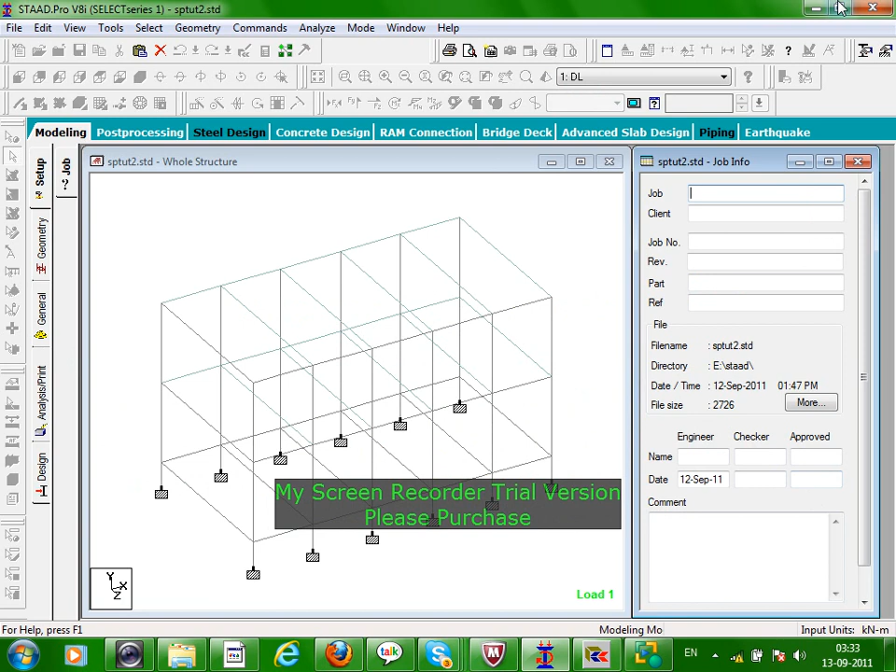In this problem, a space frame has been generated. Now you know how to generate space frames, right? You go to the structure wizard, open the frames, and in the frames give the global x, y and z direction dimensions, as well as the panel dimensions, and paste that particular model into your main frame. So this is the one problem.

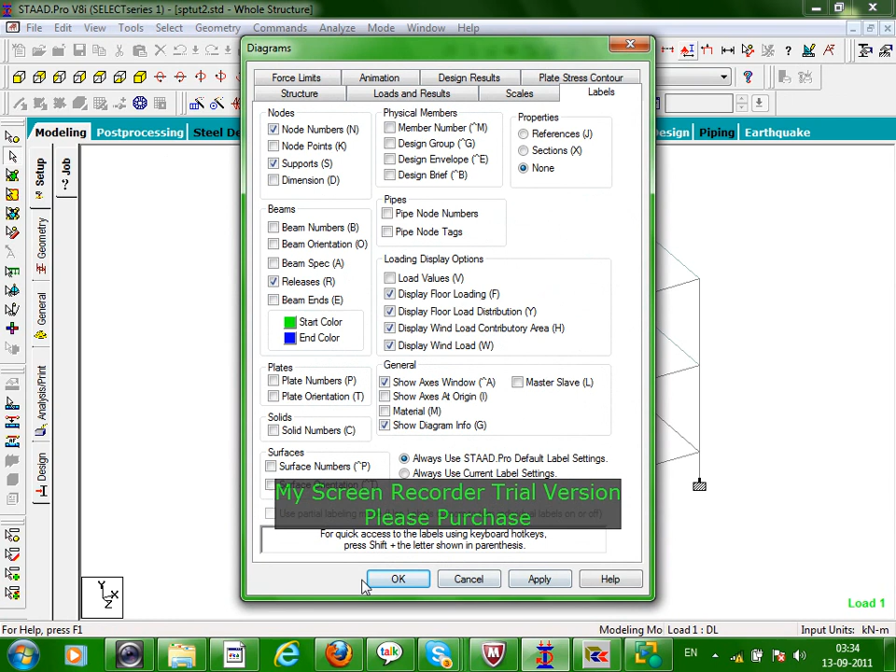Now here, if you see, just for the explanation only, I am clicking the node numbers. These are the node numbers over here. One is on this one, two, right? Like this, all these are the node numbers. Again, I am giving the beam numbers. So at any stage, if you want to see, these are the numbers.

I am removing the beam numbers, now applying the plate numbers. Okay, so you can see that at the ground floor slab level, plates are introduced: 85, 86, 87, 88, 89, then 90, 91, 92, 93 and 94 at the first floor slab level. At the plinth level, no plates are provided, only the beams. So you can see it over here. This is the simple beam.

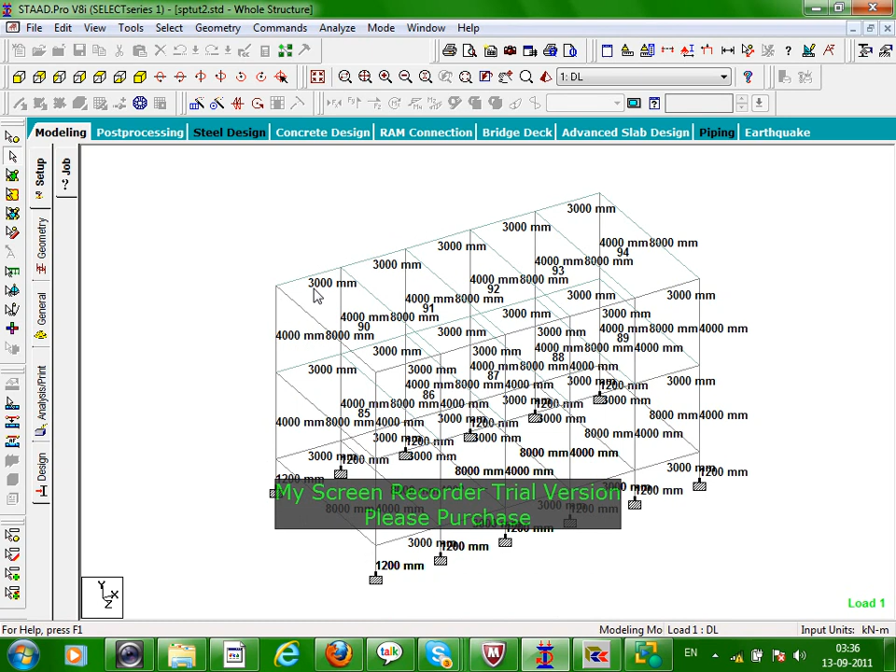As far as the dimension is concerned, all these dimensions are 3 meter each. In Z direction, the dimension is 8 meter. Plinth height is 1.2 meter. Then floor to floor height is 4 meter. So this is a simple, very typical space frame. Any input file now?

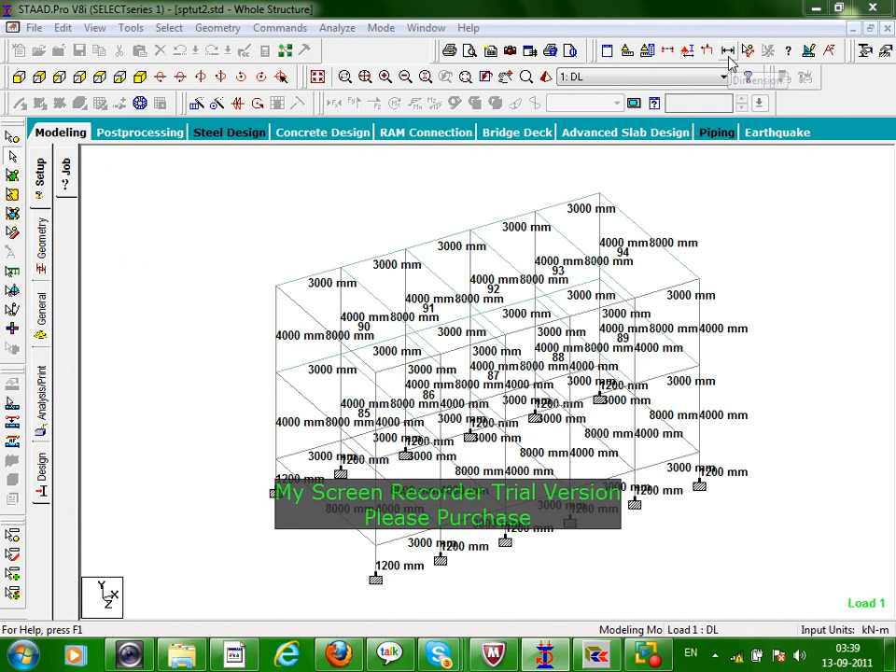Now this one you can do it over here. Let us say, as for example, I am adding one of the plate. So for that one, you go to the geometry, add plate. I am using another version.

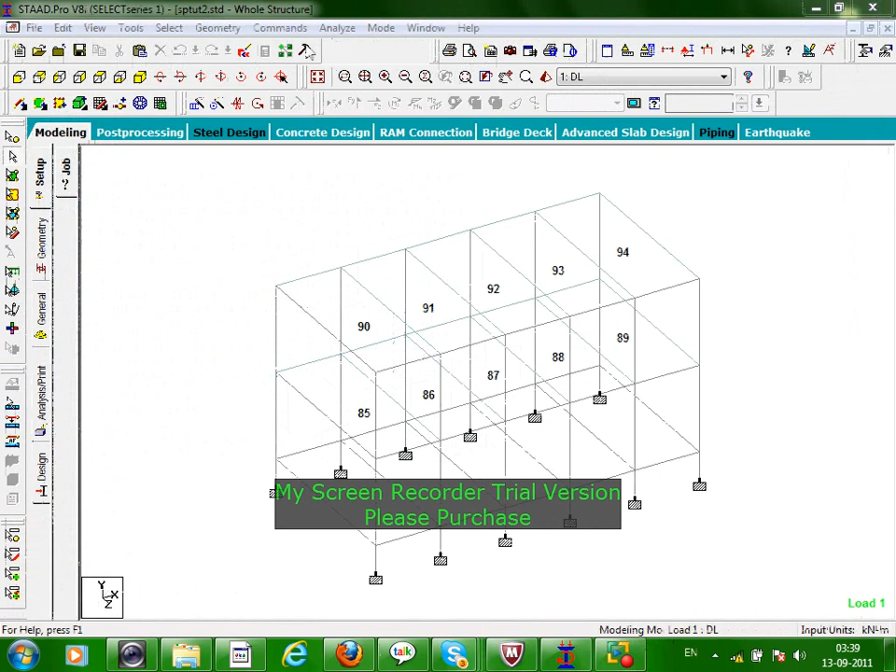So to add the plate at any circumference, you have quadrilateral and triangular plate. So I have selected quadrilateral, selecting the node. So another plate is being added, that is plate number 95. Again, this particular plate, 95, 96. So this is how you have to add the plate.

It is not like that way that in XZ plane only you can put it. Suppose if you want to add one of the plate over here, that you can do it. So this particular plate, 97 number plate, is in YZ plane. Vertical. At any stage, suppose if you want to add it, because this is a very small problem, but if you want to edit any particular member specifically, that you can do.

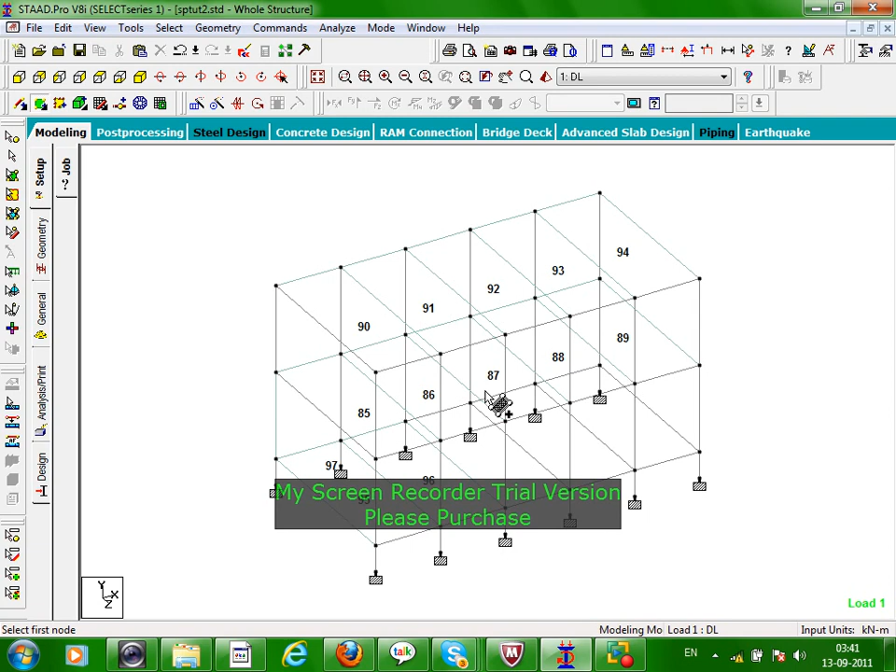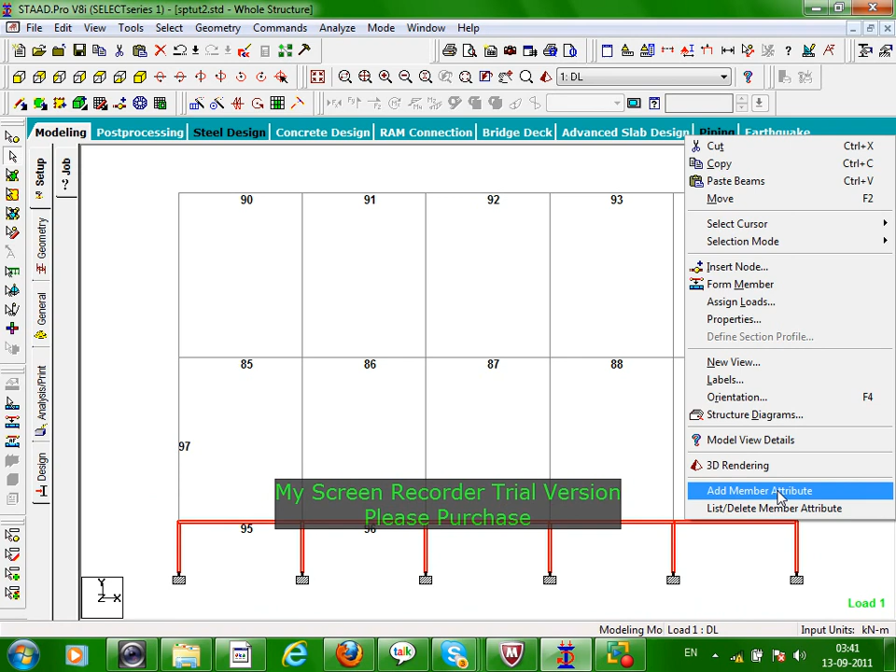Let us say I want to work over the planes, so select that one, right click the mouse, new view, create a new view. Okay, now it's 3D. Plate cursor you have to provide. No plates over here. Right. If you want to go back, whole structure, click that one.

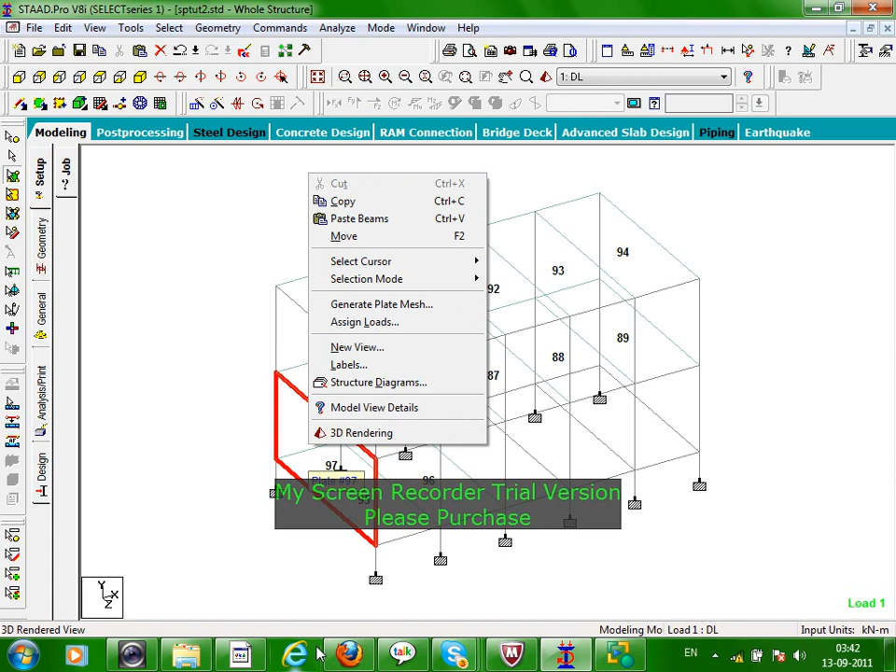Now I am removing this one because at present it is not so required for me. Plate number 97, 95, 96. So I am going to the editor. Removing that one. Okay. So this is how you have to input the plates. At the maximum, sir.

Now the loading. Supports you can give it, no problem. So commands. Loading.

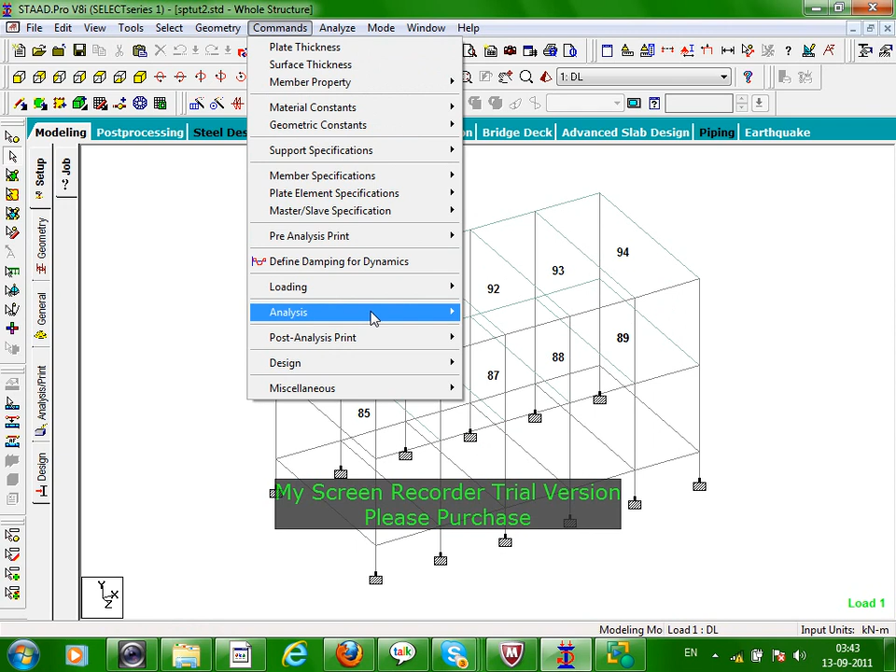I am closing this one. And while going through the editor, showing that one. See, the element property is being given. So 85 to 94, all these plates are of 0.15 thickness. Supports 1 to 6, 25 to 30 are fixed. Load case 1 is the dead load.

Member load, this one is understood. Member number 1 to 15, as well as 34 to 48, 67 to 84, all are subjected to some UDL, gravitational loads, 20 kilonewton per meter. This is member loads only, that you know.

This is important now. Load case 2, specifically it is being generated. It is from the slab, because my basic idea is how to transfer the load from slab to the beam, right? So load case 2, load from the slab, area load 73 to 84, A load minus 10. What I mean to say, that on the plate 10 kilonewton per meter square total load, or it may be a factored design load, is being applied.

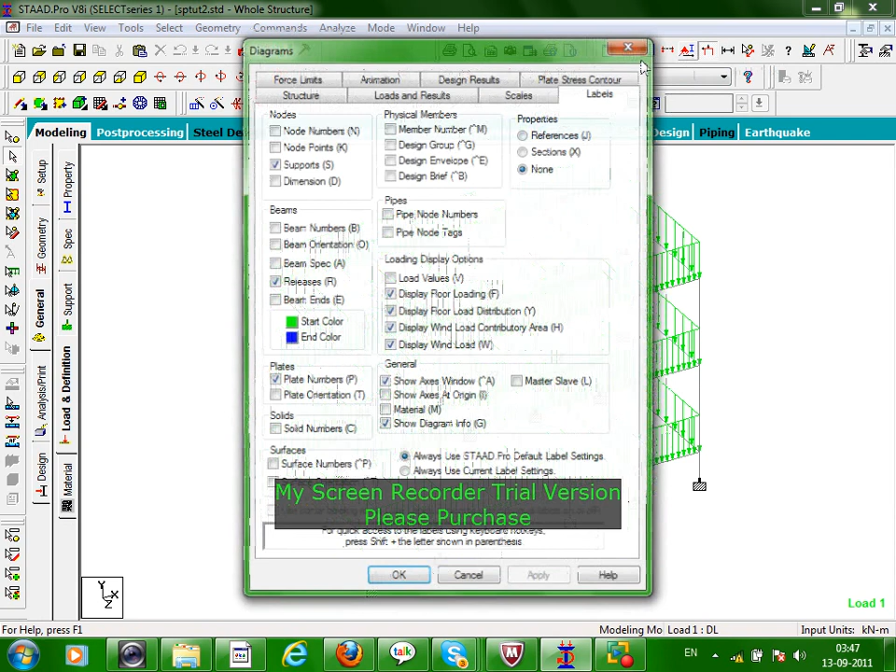See, this particular facility is over here. Dead load, live load, and these three load cases you have defined. First is the dead load. That is the uniformly distributed load, which you can see over here. Let us say load values print, apply. So you can see that all the beam members are subjected to the 20 kilonewton per meter UDL. Is it okay?

Second load case, it is from the slab. If I click it over here, it doesn't show any load. Area load would not be over here at present because it is being just generated. Once you go for the analysis, after completing that analysis, you would be able to see this load, right? So what we have given is 10 kilonewton per meter square.

This particular dimension is, let us say, 3 meter. So 10 into 3, 30 divided by 2, QLX by 2. So 15 kilonewton per meter load would be over this beam, or in this beam 2 times from plates 90 and 91. On this beam 2 times from plate number 85 and plate number 86.

So let us go for the analysis. Run analysis. Stay in modeling mode. Okay. Now you can see that load from the slab, the second load case, is on now. On this particular beam, the load from plate number 85 is minus 15 kilonewton per meter. On this particular one, it is 30 kilonewton per meter. So straight away, the slab loads are transferred in one-way distribution form. Is it okay?

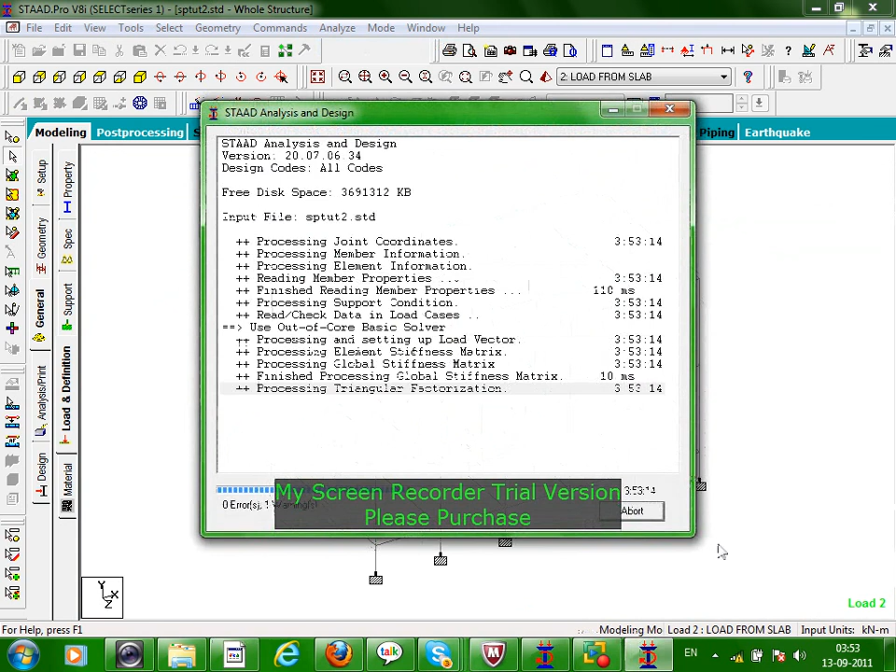Design element 85 to 94, design beam, design columns, concrete take-off command is applied, so you can find a quantitative analysis too. Now, before we see the design details, let me say that these are software only, and as a designer or as a STAAD user, you have to see how to operate this design. Because let us see the design details, these are very awkward details over here.

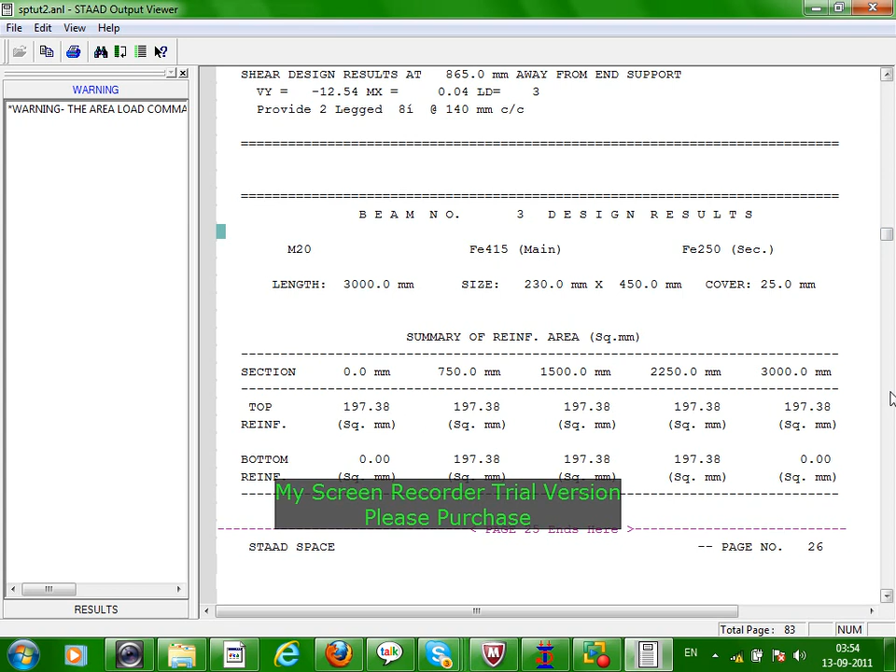So these are the member forces. So beam number 3, design results, right? M20, FE415, FE250 secondary. Length is 3 meter. Size of the beam is 230 by 450. Cover is 25 mm. Top reinforcement 197.38 mm square. Bottom reinforcement, something is given.

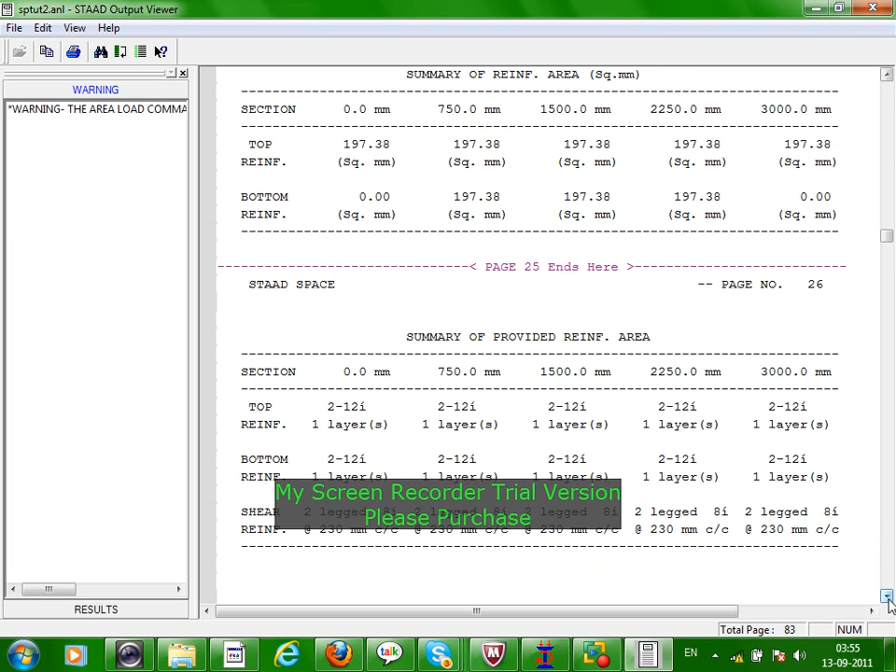So STAAD suggests providing two numbers 12 mm diameter in one layer at the top of the beam, and at the bottom two numbers 12 mm diameter. And these are the details about the stirrups: two leg 8 mm diameter, 230 mm center to center. Now once you see that one,

this is the concrete takeoff command, right? For beams, columns and plates designed above, concrete quantity represents volume of concrete in beams, columns and plates, reinforcing steel, everything. So these are the different bar diameters used in the design, and the weight required is this much, and 28.92 ton steel is required in 47.1 cubic meter of concrete. If you are interested, you can pick up this one.

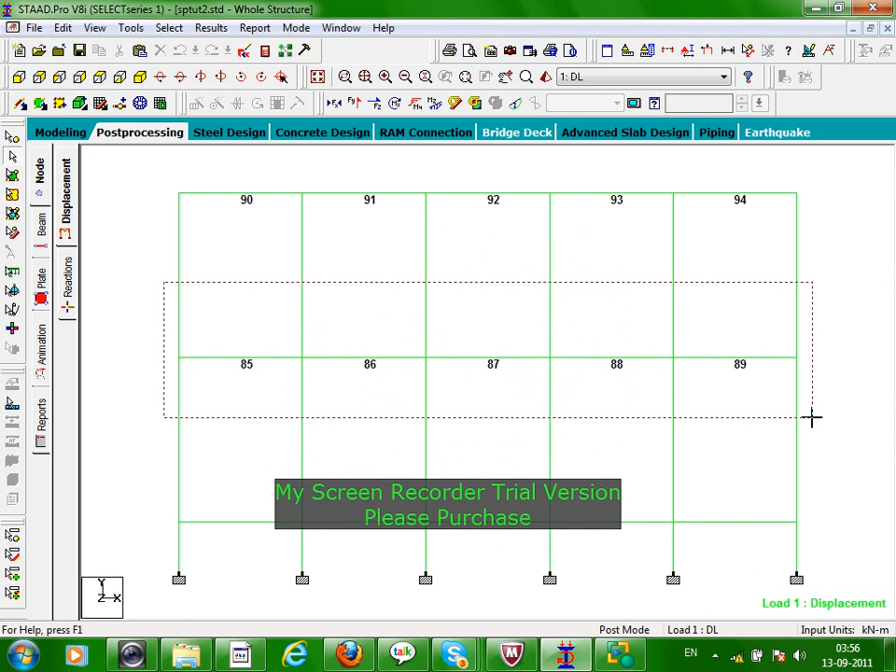So post processing mode. Let us see this post processing part. I am taking this particular part. Right click that one, new view. Okay. It's a bending moment diagram. Click that one, shear force diagram for all the beams. This is a longer beam. If you want to see the values, go to results, view values, shear.

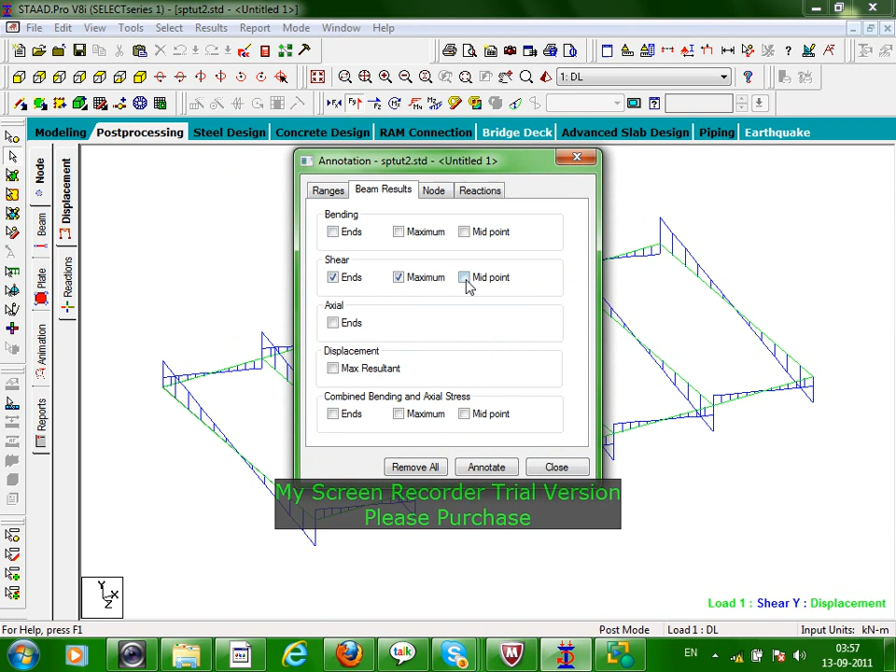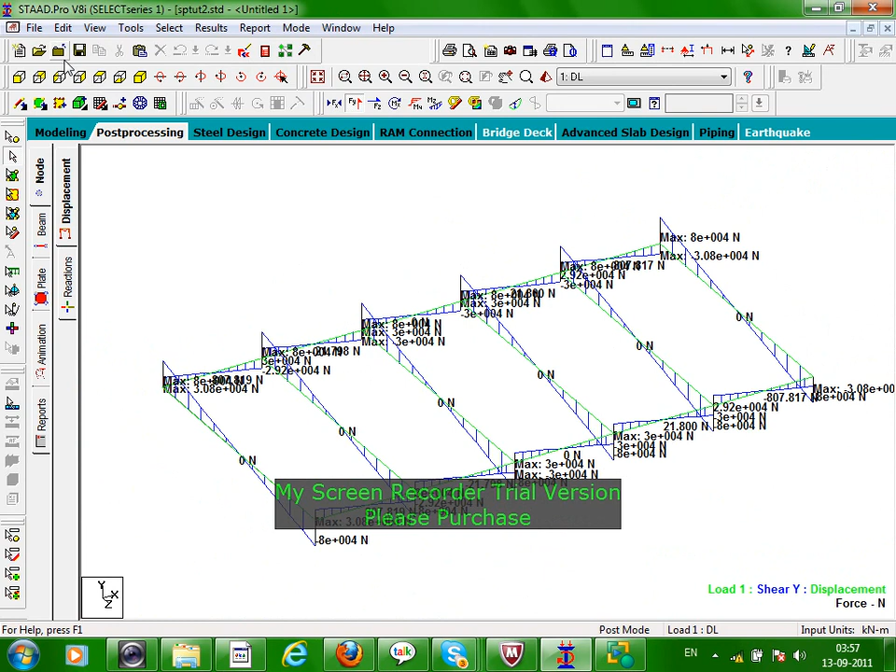If you want to see the result element wise, it's okay. Completely the whole structure, three-dimensional view. And this one, let's say

Actually, double clicking that particular member, property is okay. This is the geometry. Property is simple. Loading, shear, bending. Now you can see over here that at the support 42.34 kilonewton meter bending moment is there, and the one creating tension at the bottom is 117.66.

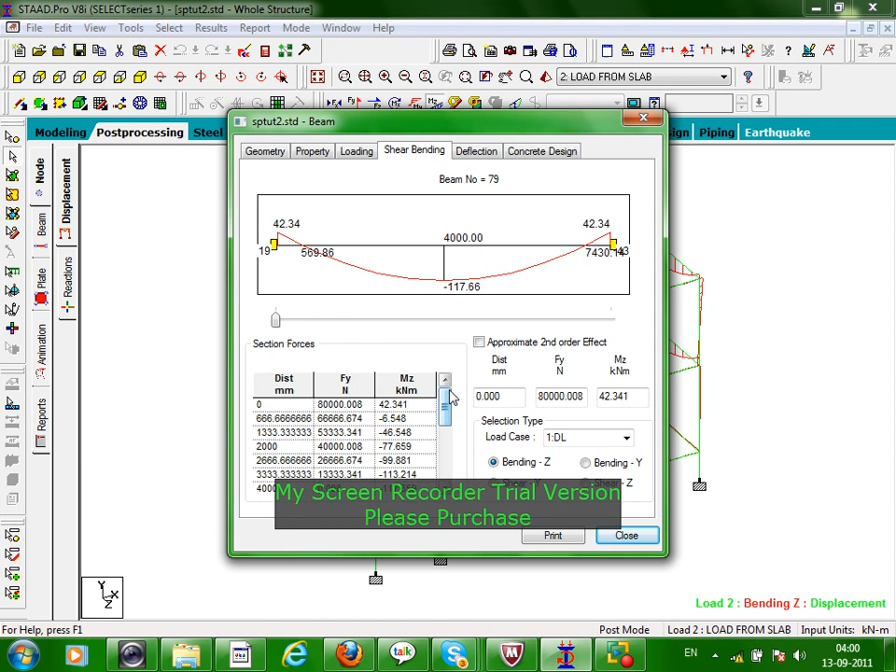at different distances along the length of the beam, you can find different shear forces and bending moments. This may be useful for the curtailment of the reinforcement, right? This is a particular beam's shear force diagram, deflection, concrete design, everything is over here.

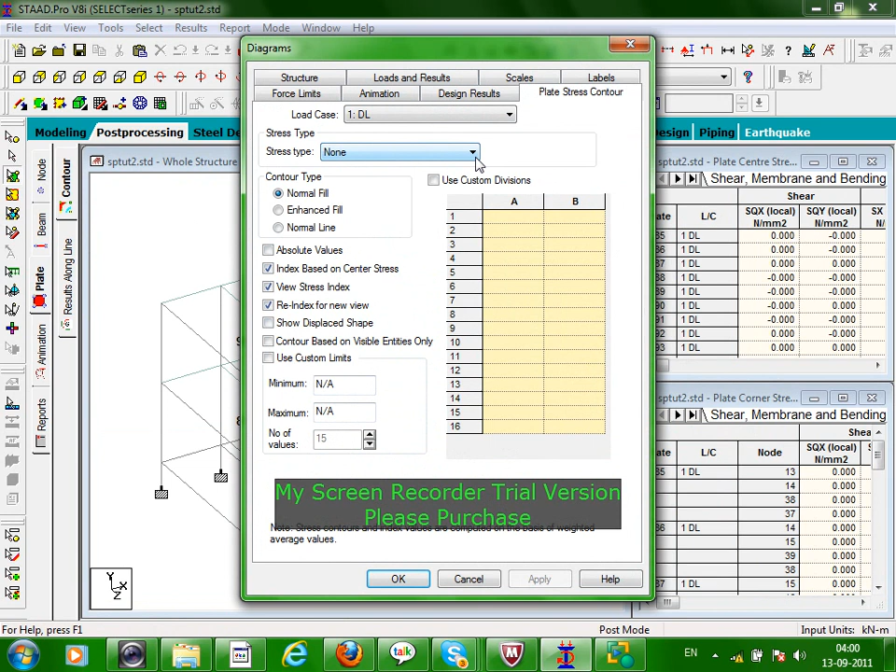So inside the slab, MX variations would be like this way. Now you have to interpret it properly, right? 0.27 local unit is being given, kilonewton into meter per meter.

These are the values. Even on the side too, different parameters, SQX, SQY, SX, all these things are given. This is related to the bending moment MY direction, MX direction.

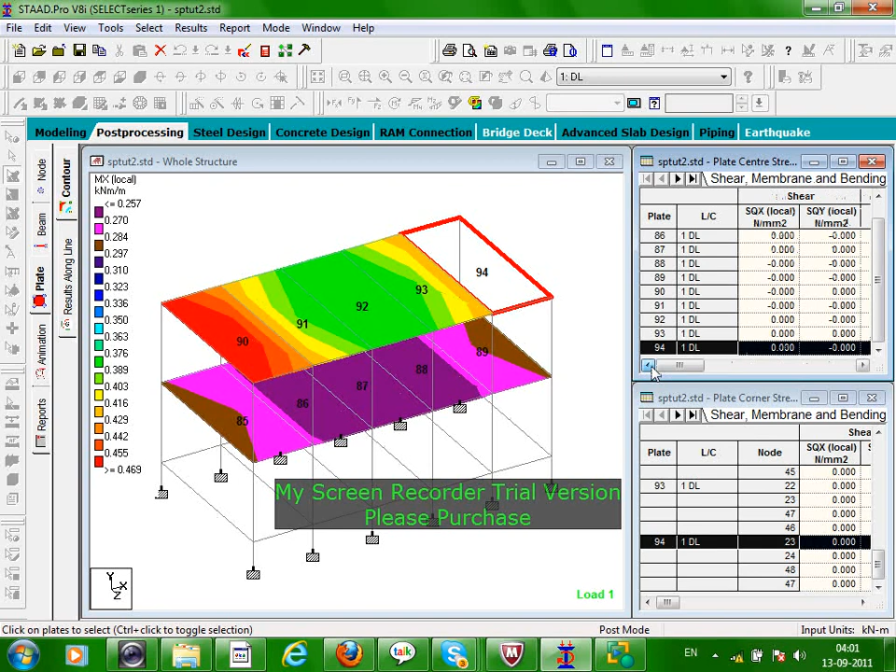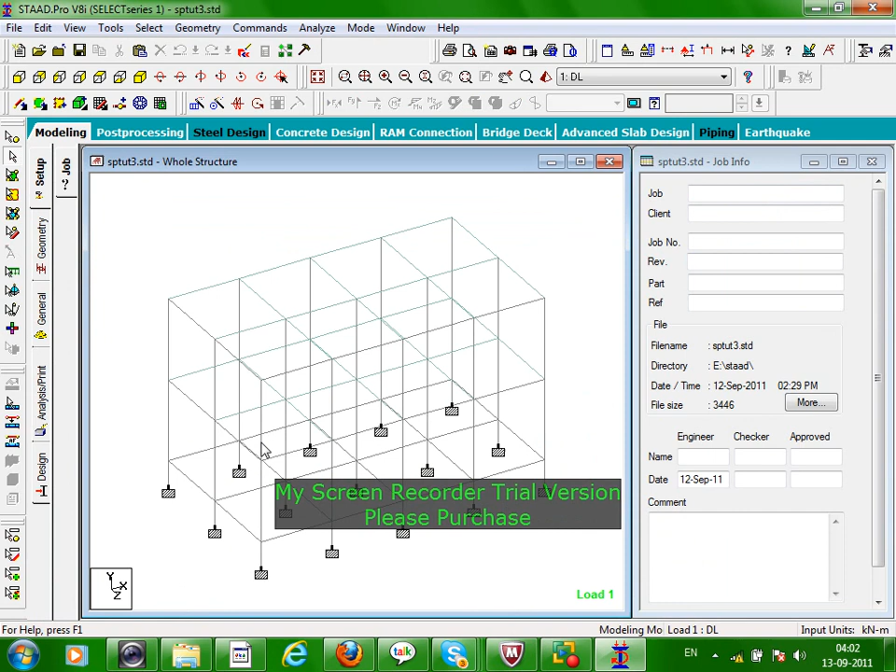Close it, file, open. Not the same problem, right? Now you can see that dimensions are different, but forming two-way action.

Screen display. So you can see that in the X directions, complete structure you have to assume that it is over here. Complete structure at this particular point, right?

Thereafter, X positive, this one. So 3.5 meter distances are there. Along the Z in negative direction, 4 meter and 4 meter. Height of the structure 1.2 meter, 4 meter, and again 4 meter.

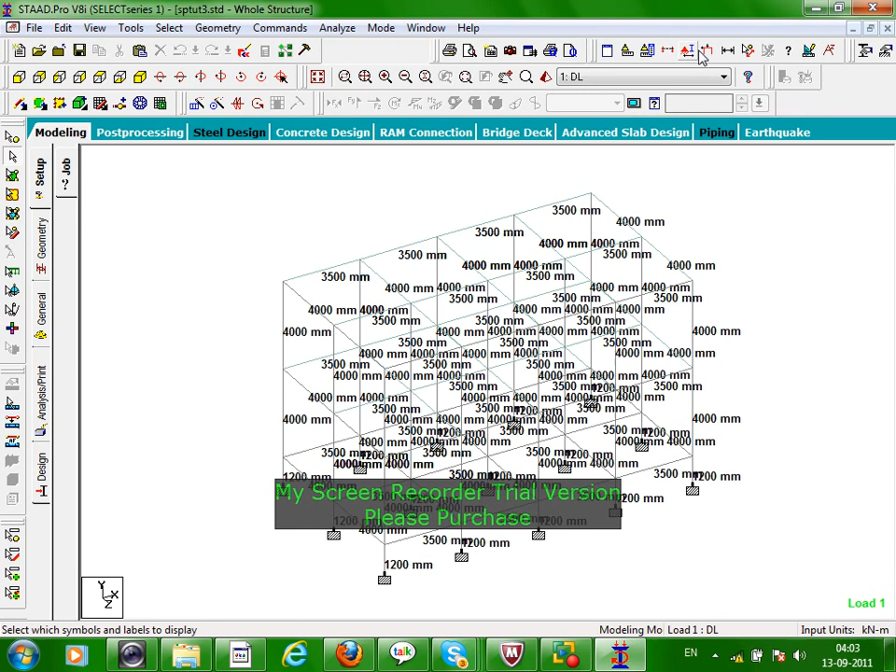Let us see this straight away. The input: units are in meter kilonewton.

Joint coordinates. As usual in the last problem too, different joints with the x, y, z coordinates are being given. Member incidences, that is all the members are connected from J end and K end. Element incidences, different elements are being added. These are the elements. Define material start, isotropic concrete materials, member property, depth, width of all the members.

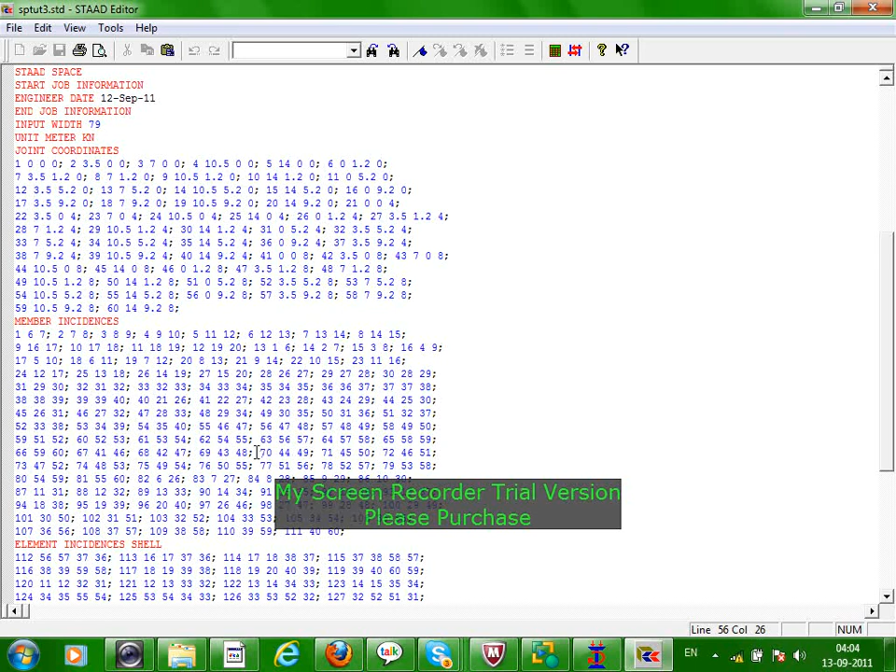Element property, all the elements are 0.12 meter thick. Supports, all fixed. Load case 1 is dead load, that is the member load. Member numbers 1 to 12, 28 and so on.

Minus 20 kilonewton per meter is the UDL. Now this particular part is important. Load case 2, that is from the slab. What I have written, now it is a floor slab. This is a floor load, because I know that plate dimensions are 3.5 meter by 4 meter.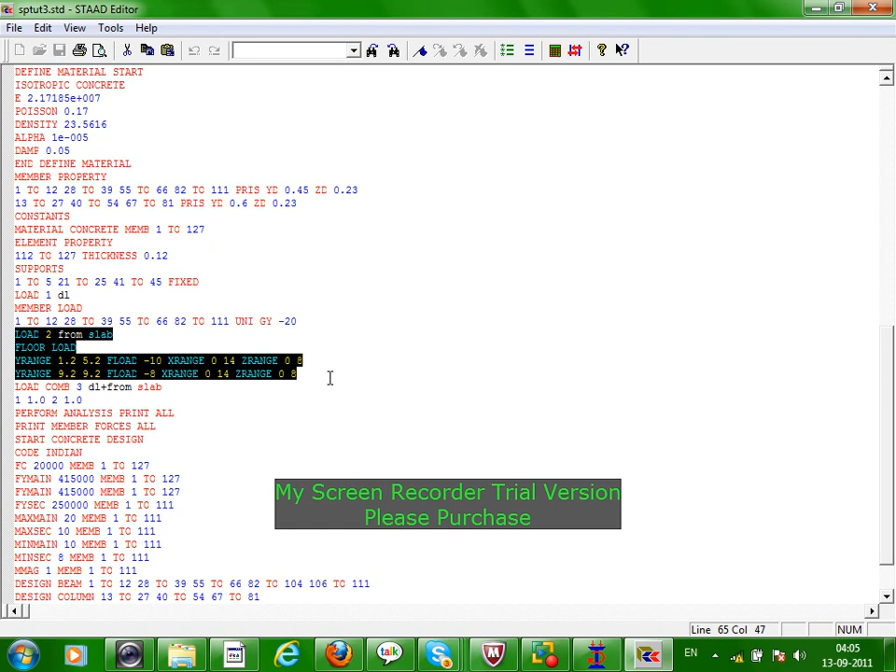Now it is not a one way, it is two way. So I have to direct the software that whatever may be the plate load, you have to transfer it to the adjoining beams in the two-way pattern. So for that one,

floor load, Y range, let us see the interpretation of this one. Y range 1.2 to 5.2. What is that 1.2 to 5.2? 1.2 is the plinth height, right? Then next floor slab will be at 5.2 meter, like a 4 meter is the height of the floor.

So 1.2 plus 4, that is 5.2. So 1.2 to 5.2, all the elements having the floor load of 10 kilonewton per meter square. X range is 0 to 14. So the elements which are in the range from 0 meter to 14 meter in the x direction, and all the elements 0 to 8 meters would be subjected to this particular load, 10 kilonewton per meter square.

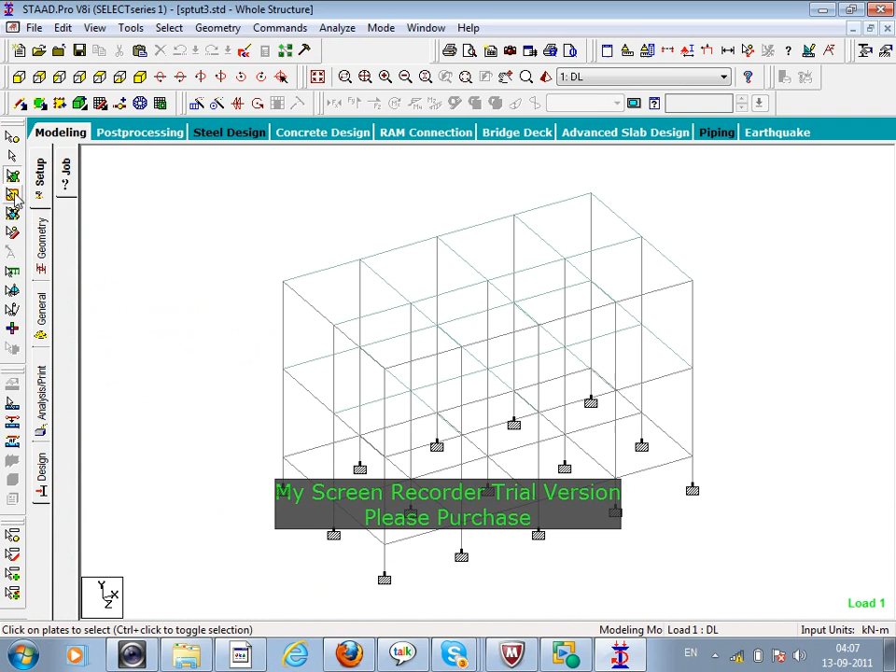Let us see that one over here. X range. See, the plates are over here. All these are plates, right? So as per that, very first one, very first line, this one, this element, or even this particular element, or this one, or this one.

X range I have given from this point to this point. Y is obviously 1.2 to 5.2, right? So at this particular height, X range is this one, Z range is this one, and into that range, that means that this particular area, all the elements would be subjected to load of 10 kilonewton per meter square.

If you want to say this one, this you can see, right? Even see this particular plate number 113, right? This one.

Whatever may be load on this particular plate, shorter dimension is this one. So QLX by 3, it's a triangular loading is over here. This is 4 meter height, right? So this is a longer dimension, and you can see that the trapezium loading is there.

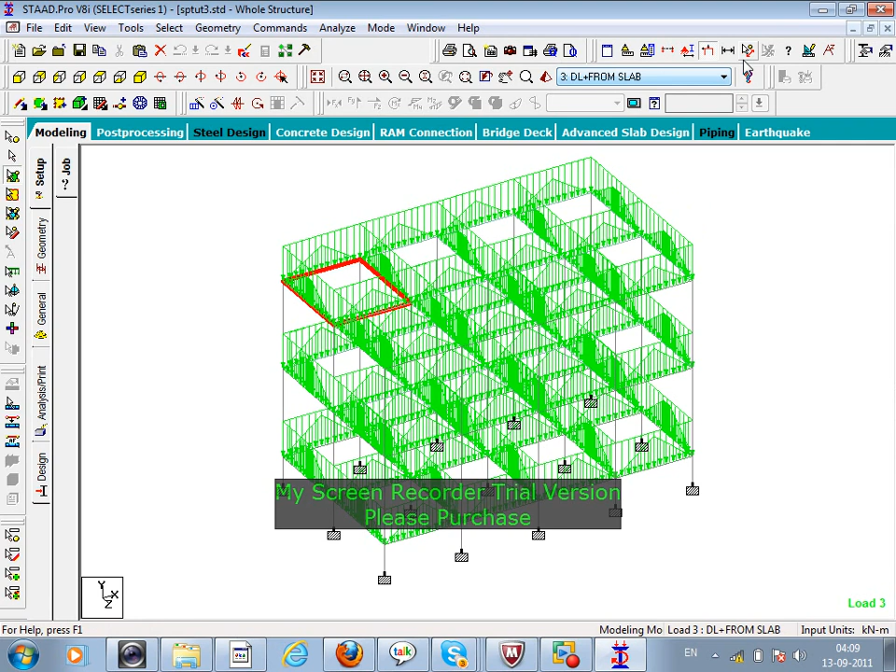Let me remove that door. Now you can very clearly see this, right? It's a trapezium loading. On this one is a shorter side. It's a triangle, then trapezium, triangular loading.

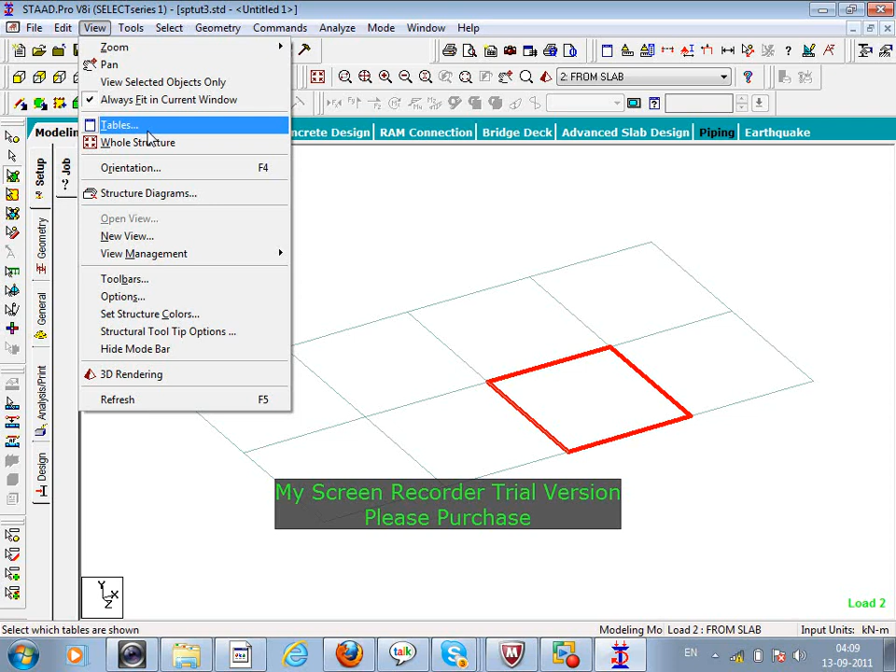Structure. So now you can see that it's a trapezium loading, right? This one.

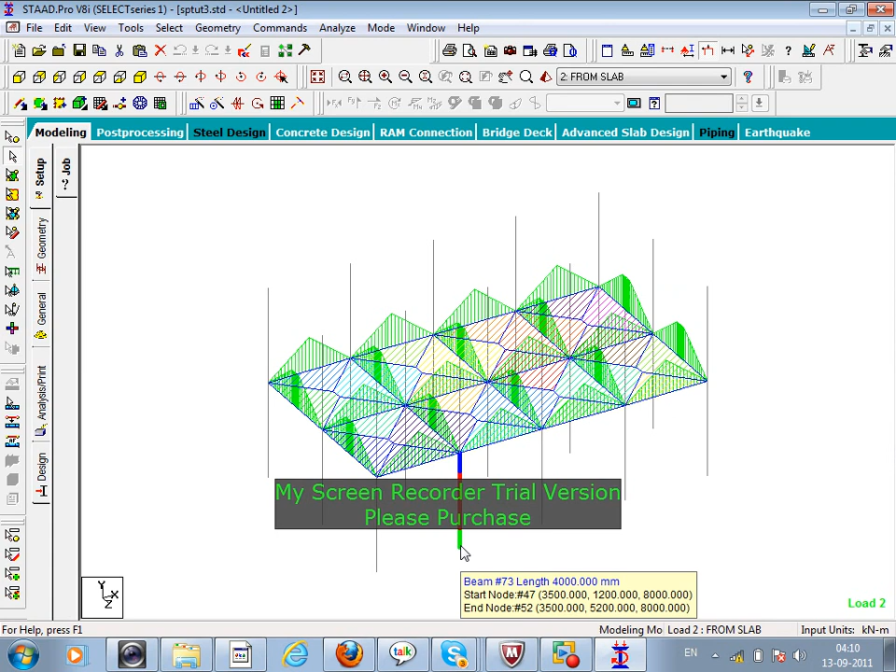Other things are simple now. View again the full structure. Then if you see that input,

load case 2 from the slab. Specifically, two different floor loads are being given. So next line is Y range 9.2 to 9.2. That means at the topmost floor, terrace level, 9.2 meter to 9.2 meter. Again the floor load is slightly different, it is 8 kilonewton per meter square. In the next line, X range is again 0 to 14, and Z range is 0 to 8.

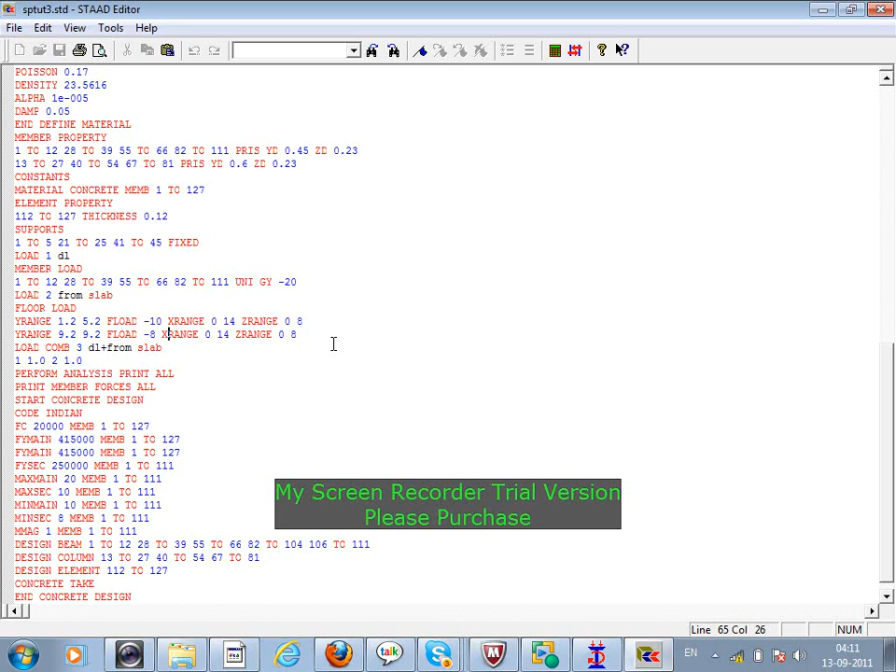Thereafter, load combination has been performed. Other things remain same, and the concrete design.

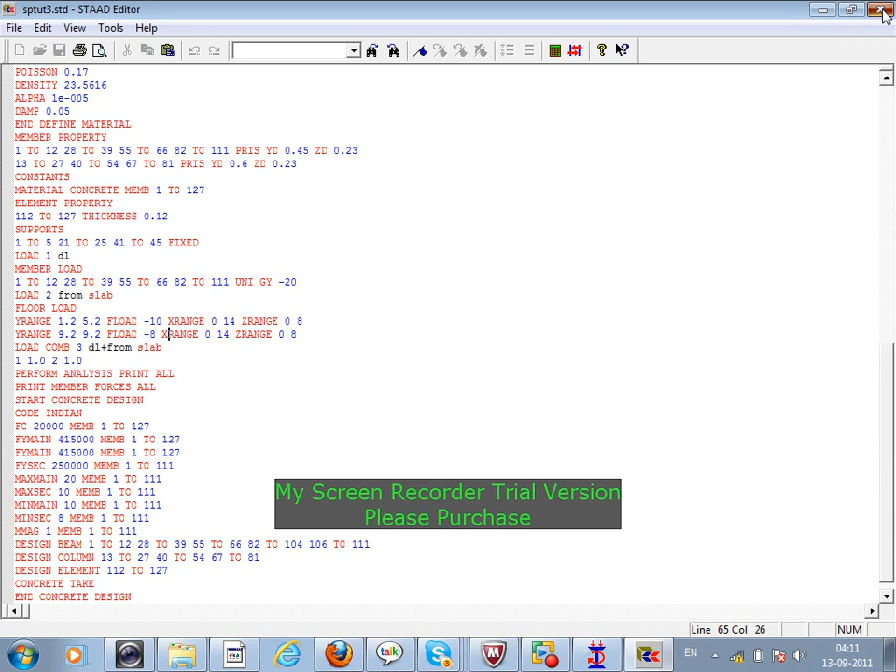So specifically, let us say I am taking one problem very fast, so you can see how speedily you can generate the building space.

Meters, kilonewtons. Next, open structure wizard. Finish that one.

Cross models. So pick up the frame models, bay frames. Let us say length is 8 meter, height is 6 meter, and width is 3 meter.

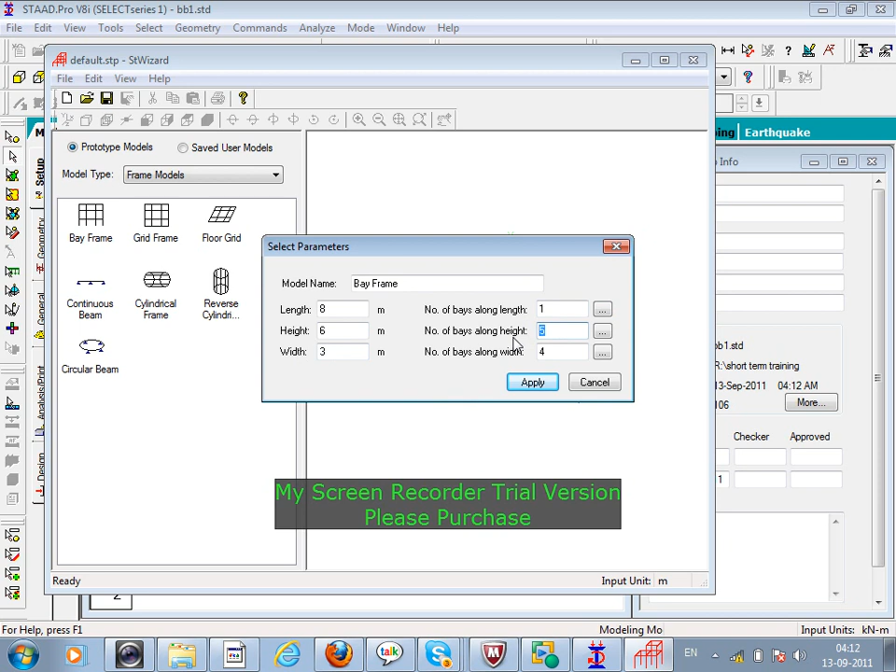Along the length, 1 bay. Along the height, 2 bays. Along the width, 1. Apply that one. Edit, paste, and so.

Is it okay? No? Thereafter, commands.

Member property, prismatic, rectangle, 0.75, depth 0.23 is the width. Add that one. Close. For the simplicity, I am taking all the dimensions same.

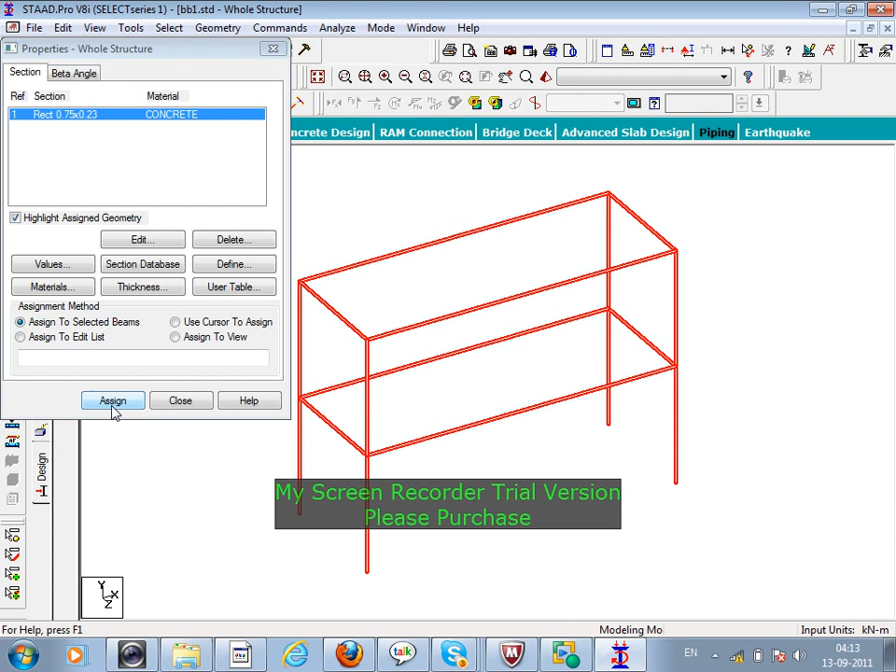Geometry, add plate. Once the plates are formed, go to the command plate thickness that you have to give it, let us say 150 mm thickness of the plate, material is concrete, add it, close, select that one.

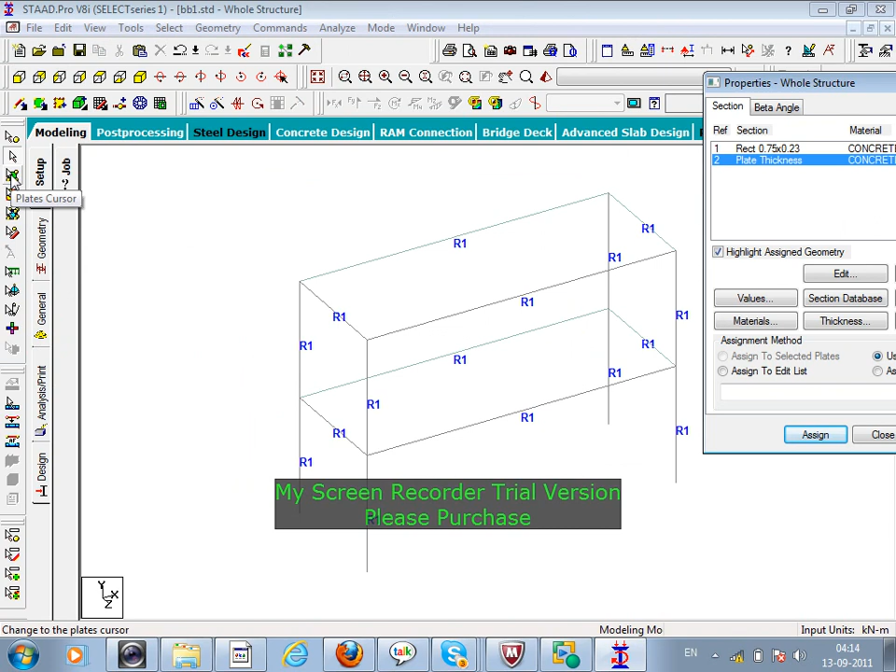So for that, pick up the plate cursor, select this one, and this assign, yes, and close it. Is it okay? So as soon as you do these things, input file is ready with you.

Next thing is the commands, support, fixed, edit, select that one, and using the node cursor, select the nodes. Yes, and close.

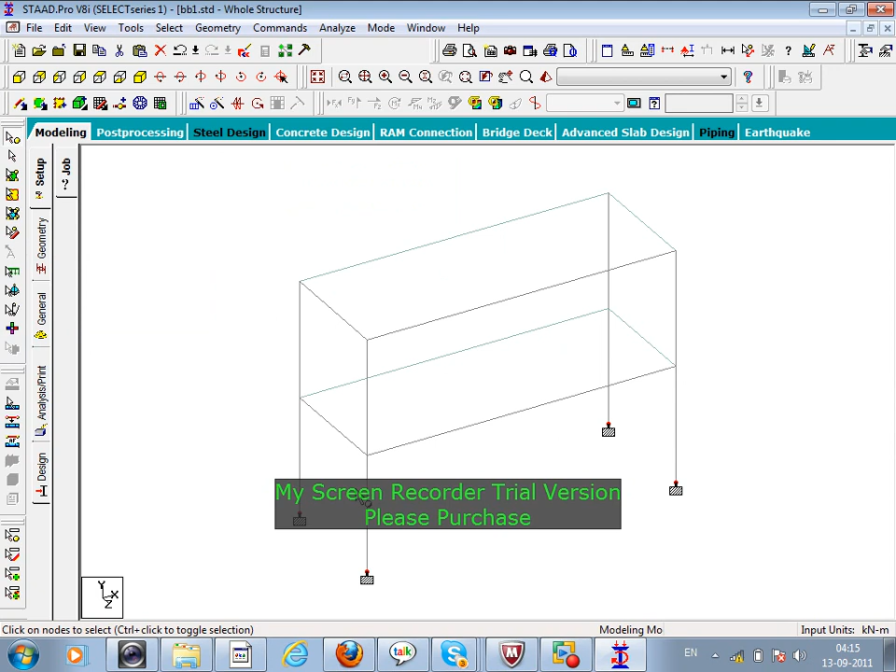How much dimension have we given over here? Let us see that one. Dimensions to view, display, meter, close it.

Now, these things normally happen that you need to change the building as and when required. Sometimes the architect provides the drawings this way. Thereafter, once you analyze and design, the architect says we want to provide 2 more columns over here.

Now, editing is also an important part. So what we have to do is insert the nodes somewhere over here. Let us say in this particular beam, in these 4 beams, I want to insert the nodes.

So what I have to do: geometry, insert the node in this particular location, at midpoint, okay done.

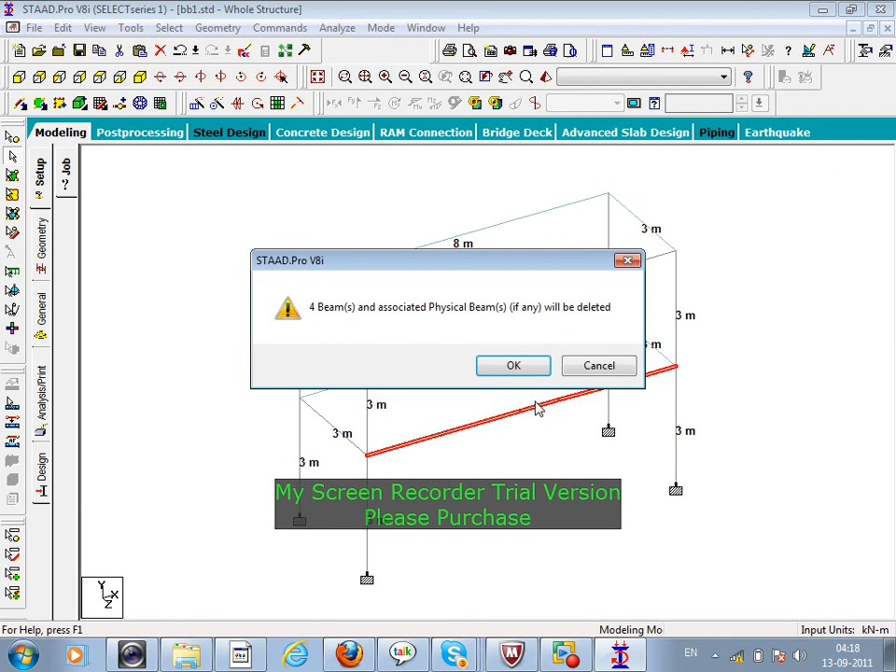Geometry, add beam from point to point. This one to this one.

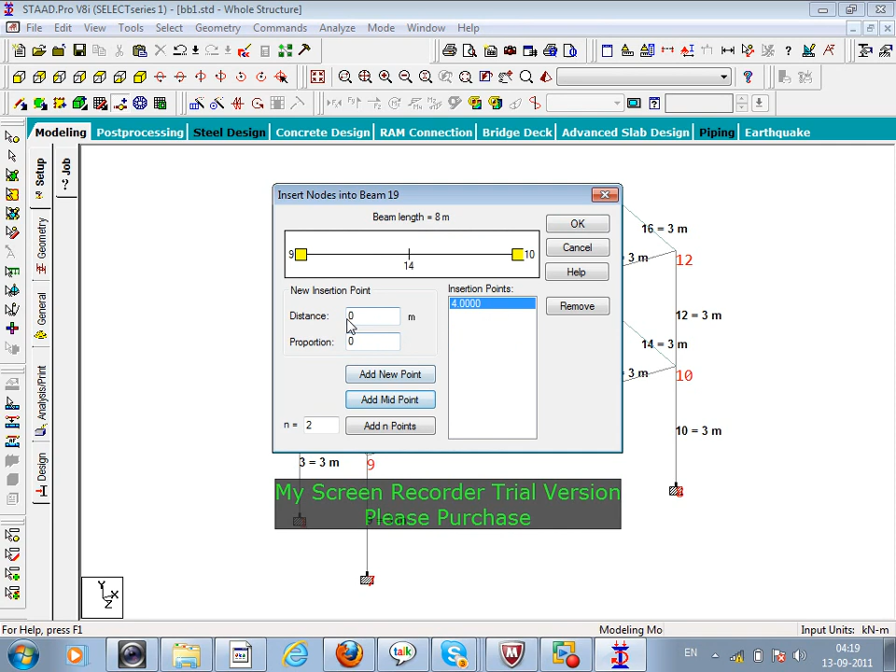Midpoint over here, so node number 14 is that. In this particular beam, again at midpoint. Okay.

So plates are over here. I am deleting that one now. These plates I am removing.

Element incidences, all these things I am removing. Save it.

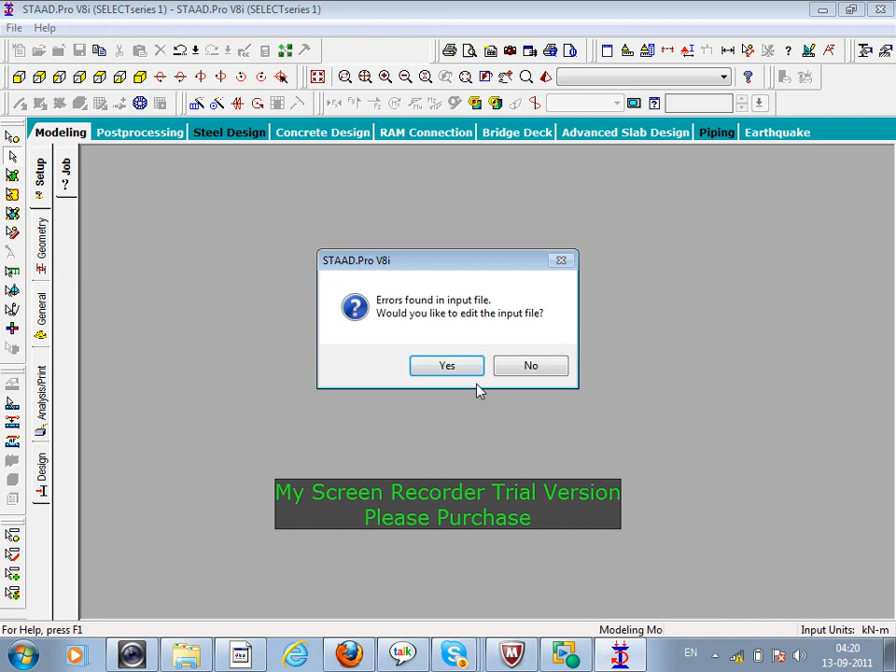So these are now two different beams, right? Once the nodes are added, these are the two different beams.

Let us say add the plate over here now. Geometry, add plate. Again, next plate is over here.

Another plate. Thereafter another. Now, as soon as you change these things, you have to give the properties again. See that.

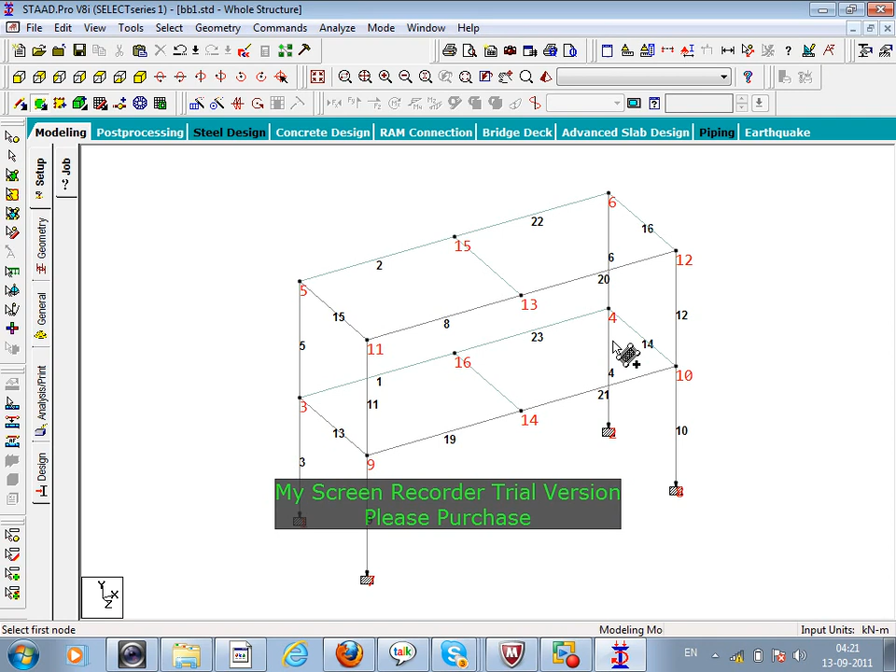So commands, plate thickness, yes, I am giving only one. Edit, close that one.

Use cursor. Assign, yes. Now you can see that this beam has been edited.

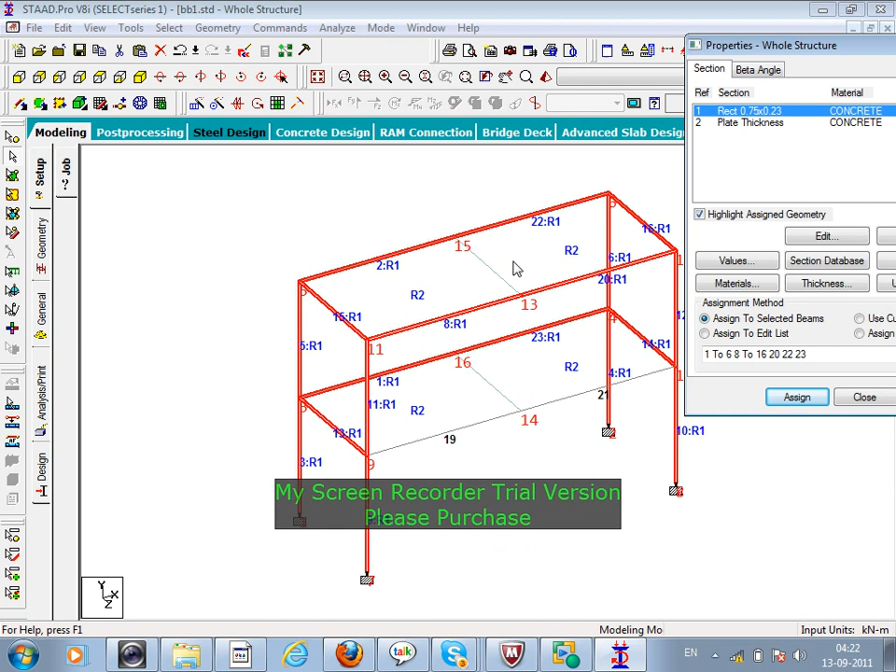So all these members are being assigned, but this particular member and this member too, this one will assign.

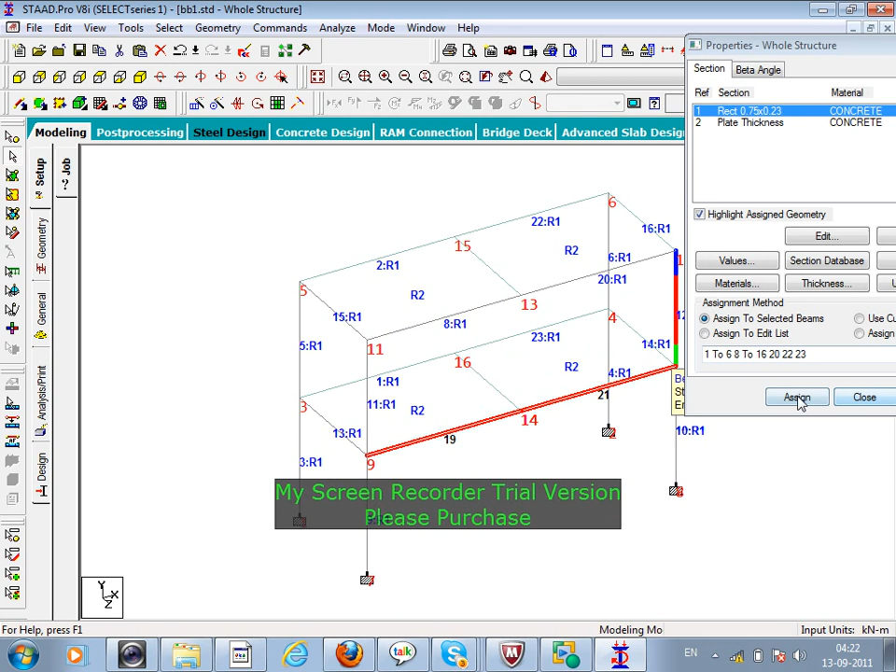I think you need one beam over here. So I am going to the geometry. Beam from this point to this point. Then commands, member property, prismatic, cancel this one.

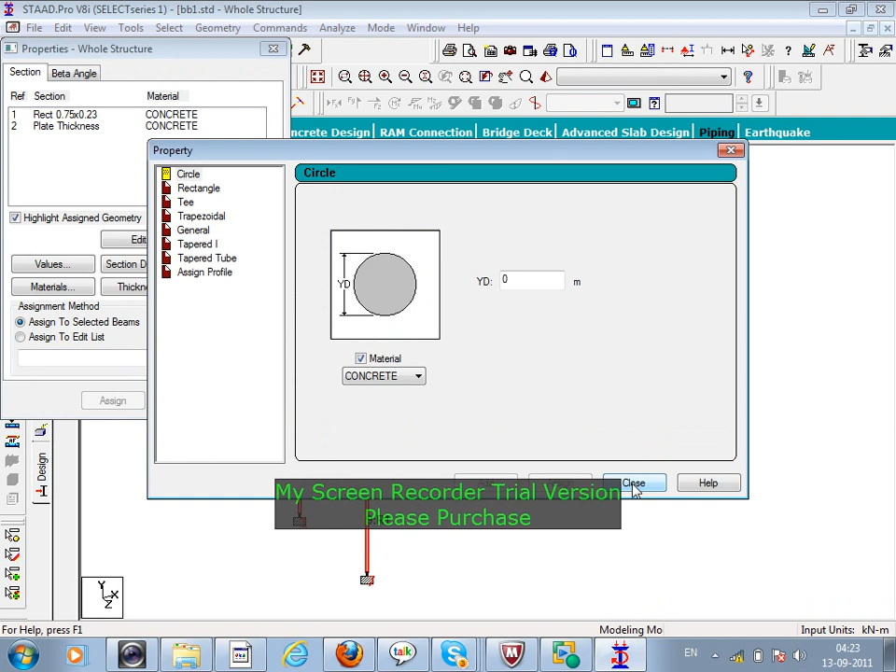So now everything has been given except the loads. So plate number 24, 25, 26, 27. Let us see that input. They are being defined over here, along with the thickness, all the properties, everything.

Commands, loading. Primarily, I am taking simple load case from slab. This one is especially required.

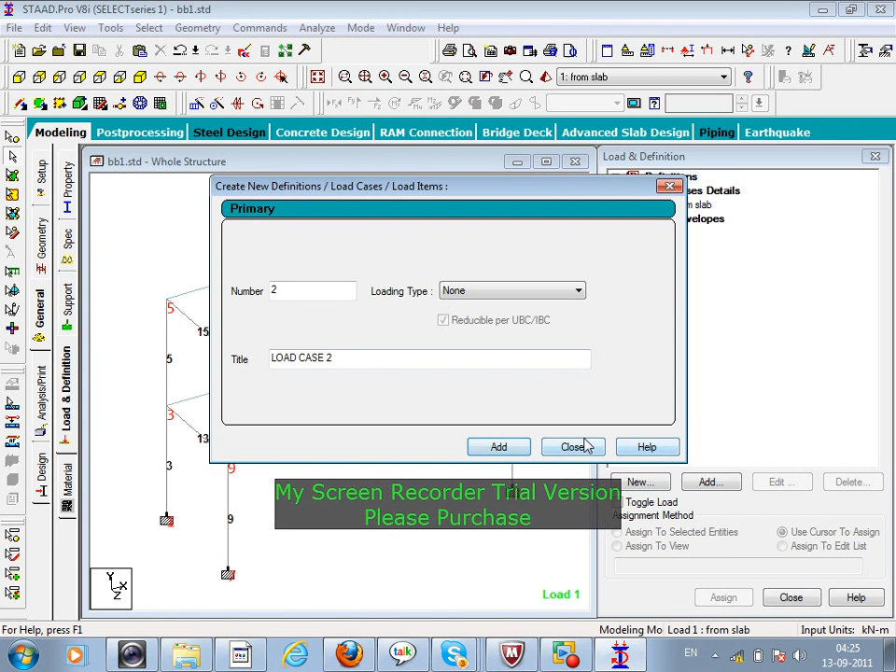As a structure designer, sometimes we don't follow IS 456 very strictly. Let us say in a particular residential building, even myself or sometimes Sumant, one of my friends, and the slab dimensions are 3 meter by 4 meter.

We don't want to provide beams on some other sides. So even though it is a two-way slab, we design it as a one-way slab and transfer the loads to the adjoining beams. More or less we often do that one. Now if we want to perform the same type of analysis in STAAD, you can do it over here too.

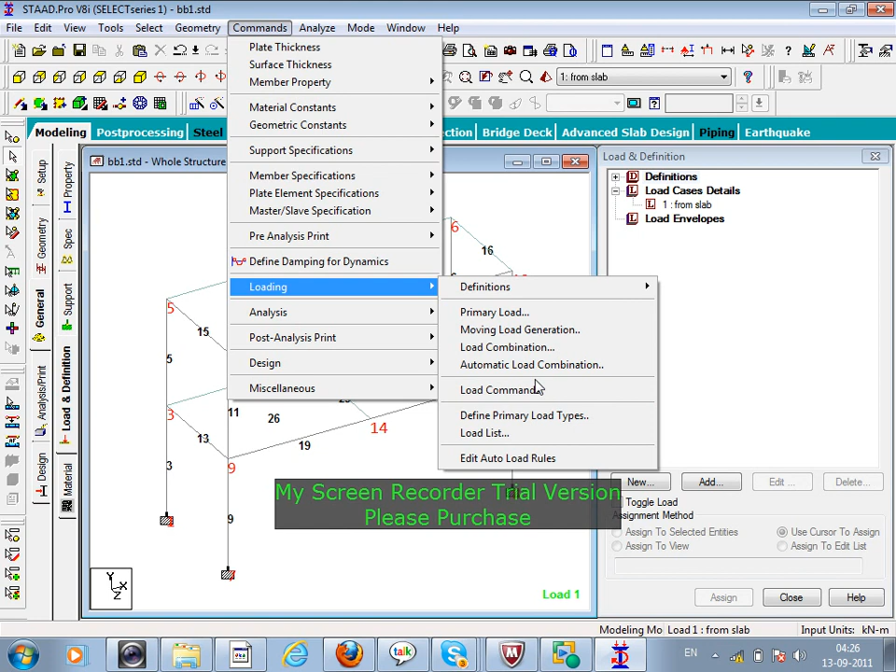Floor loads, pressure, minus 10, Y range. I think we have taken 4 meter.

Let us see the dimensions first. 4 meter and 4 meter in X directions, 3 meter in Y directions, and 3 meter in Z direction, X direction 8 meter.

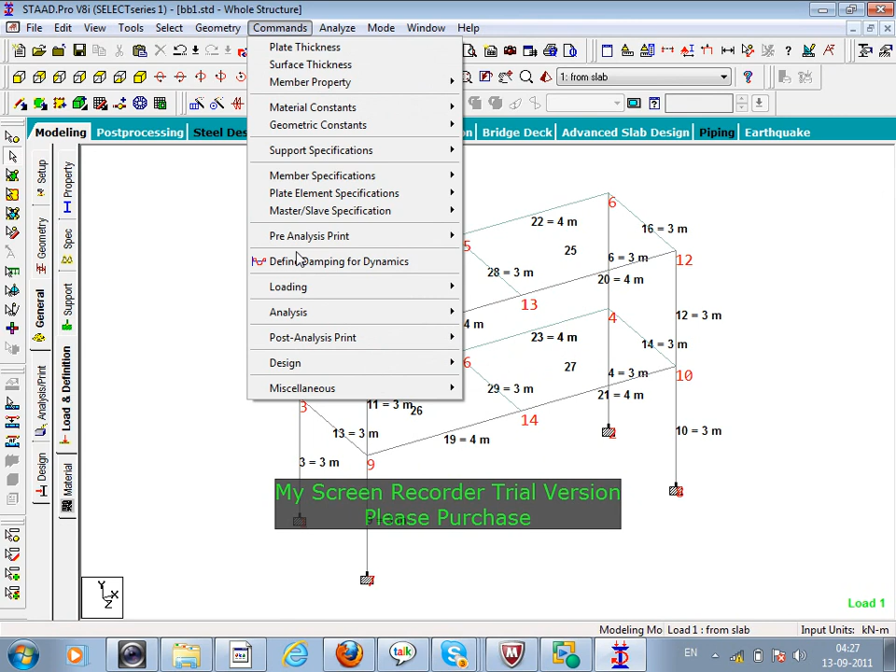Loading, floor loads, minus 10. Let us say this particular 6 meter, check the dimensions: 0, 8, 3.

See, this option is available now, right? One-way distribution, click that one. If you don't do this, the loading would be transferred from a two-way slab. So specifically, I am saying that make it one-way distribution.

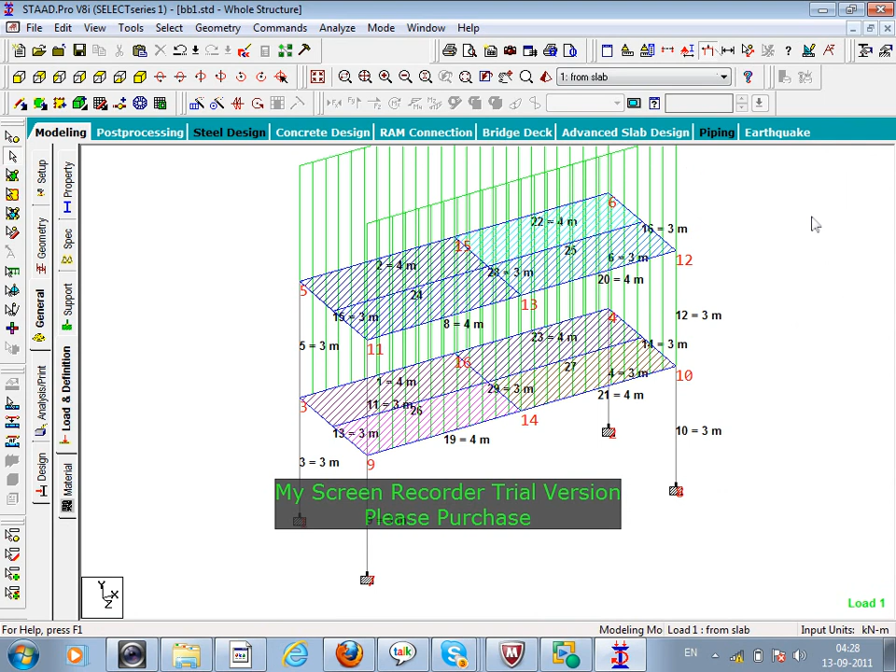So a 4 meter by 3 meter panel is there. Let us say this particular panel, taking this one. This dimension is 4 meter, this dimension is 3 meter. So as per this, it should be a two-way slab, but you can see that now it is being distributed.

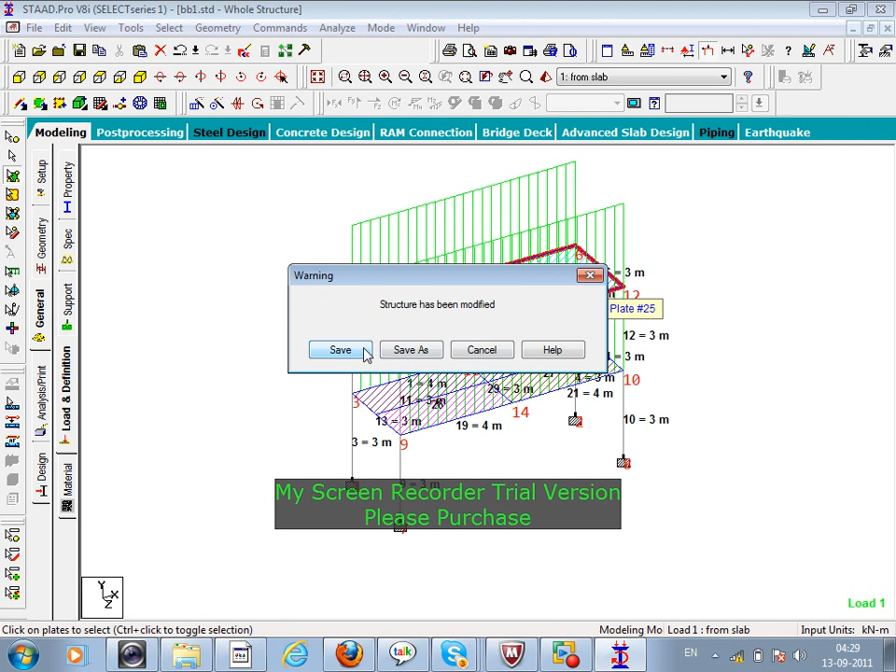The load has been distributed to one way, right? So inside the floor load, you have the option whether you want to transfer it strictly as per the two-way or one-way. If you keep it as one-way, check this: suppose a 4 meter by 4 meter panel is there, and if you apply the load, let us say 10 kilonewton per meter square,

give one-way distribution into the floor load, see what happens. Because now STAAD does not know in which direction you want to transfer the load. So 10 into 4 divided by 2, 20 kilonewton per meter load would be applied on all the 4 walls. So naturally, it creates a problem for the software because it doesn't know in which direction you want the one-way distribution.

Right, here along the longer side, the software has transferred the loads. But if it is strictly a 4 meter by 4 meter or 3 meter by 3 meter panel, then it creates a problem. Now, let us see one more problem.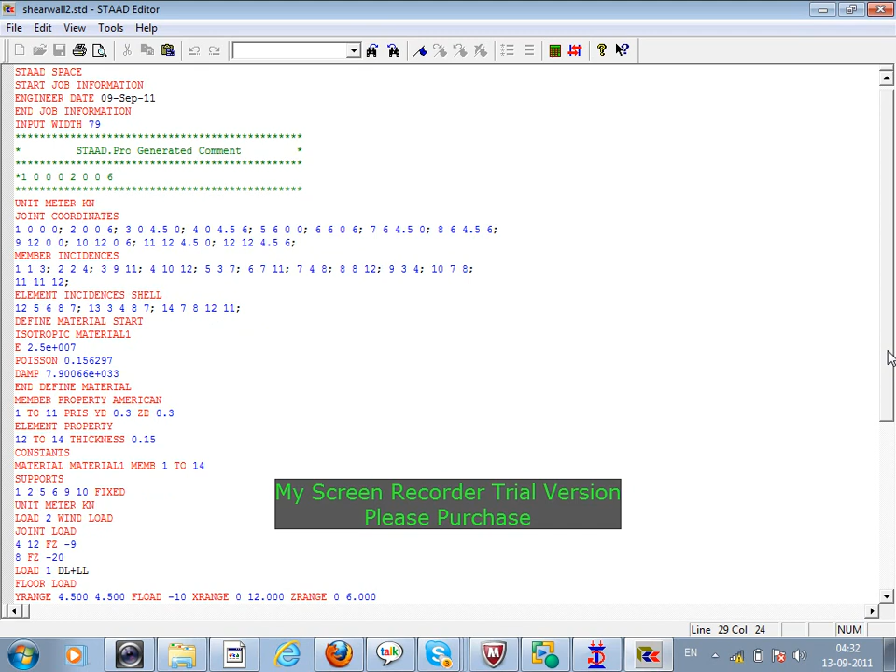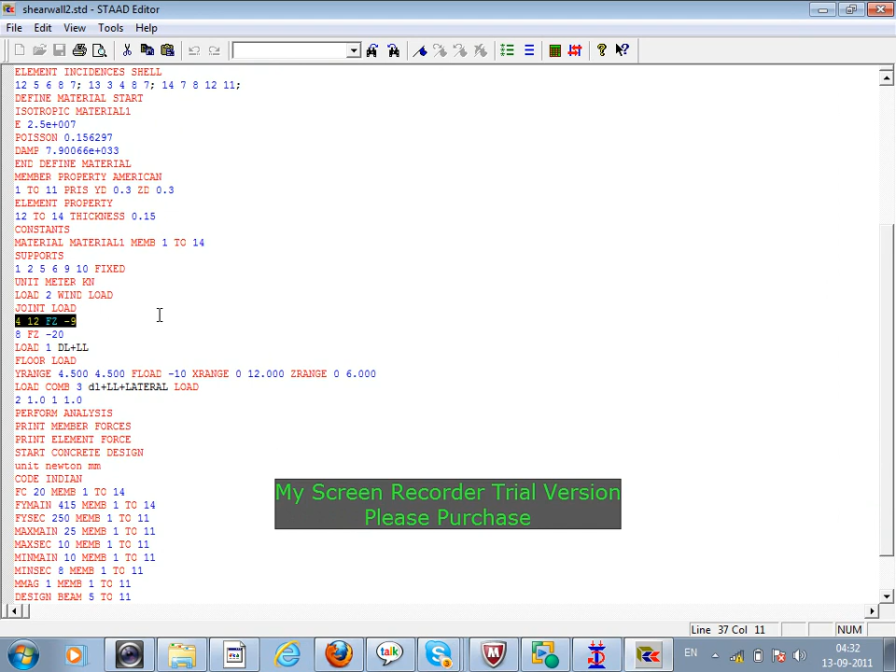First, this name is being given for the lateral loads, wind load. It may not be exactly that one, but the joint loads are being given in Z direction at nodes 4, 12 and 8: minus 9 kilonewton and minus 20 kilonewton. So these horizontal loads are being given on the frame.

Then another load case is the dead load plus live load. So floor loads are being introduced with the Y range 4.5 meter to 4.5 meter, 10 kilonewton per meter square, 0 to 12, 0 to 6. And then load combination has been performed and the design. Maximum sizes are here.

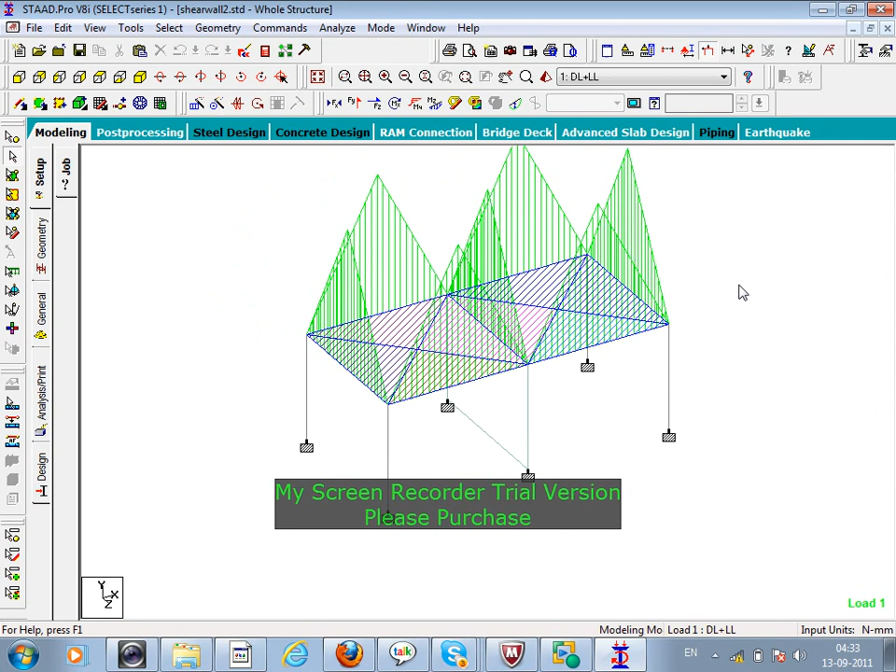Floor loads distribution, wind loads - this is 9 kilonewton, very small line, somewhat big arrow 20 kilonewton, and 9 kilonewton. If you want to see the values, you can see load values, apply. So 9, 9 and 20 in the Z direction. If you go for the analysis,

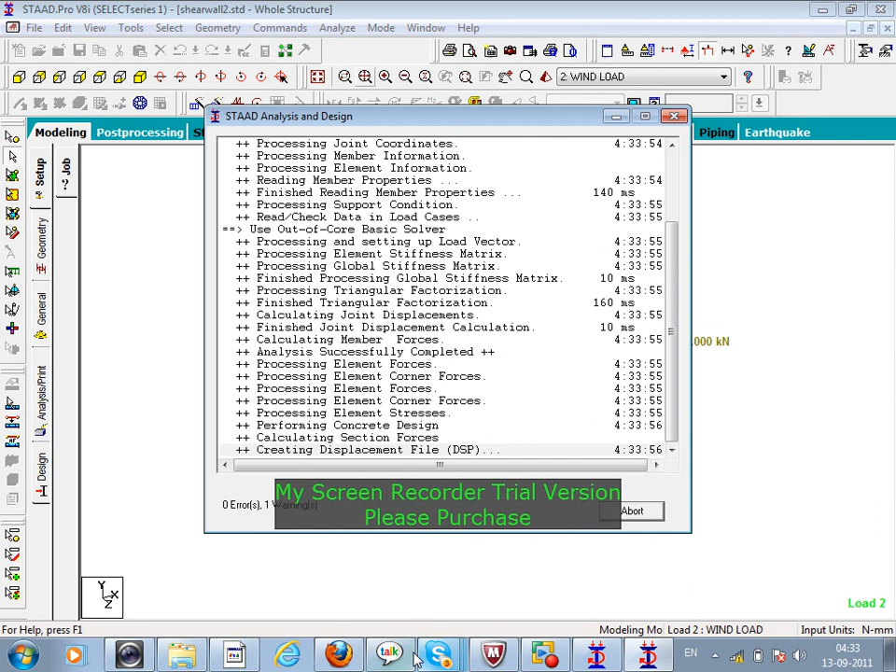mode, post processing, results, stress contour, normal, MX, and apply.

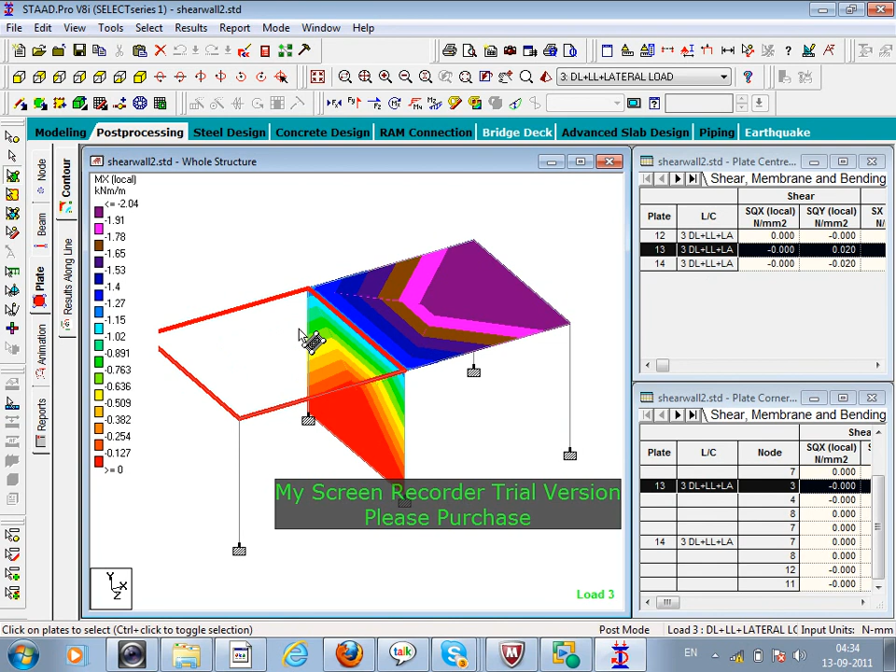So stresses in the shear wall would be like this. Okay, and these are the stresses in the slabs. So this is for the load combination.

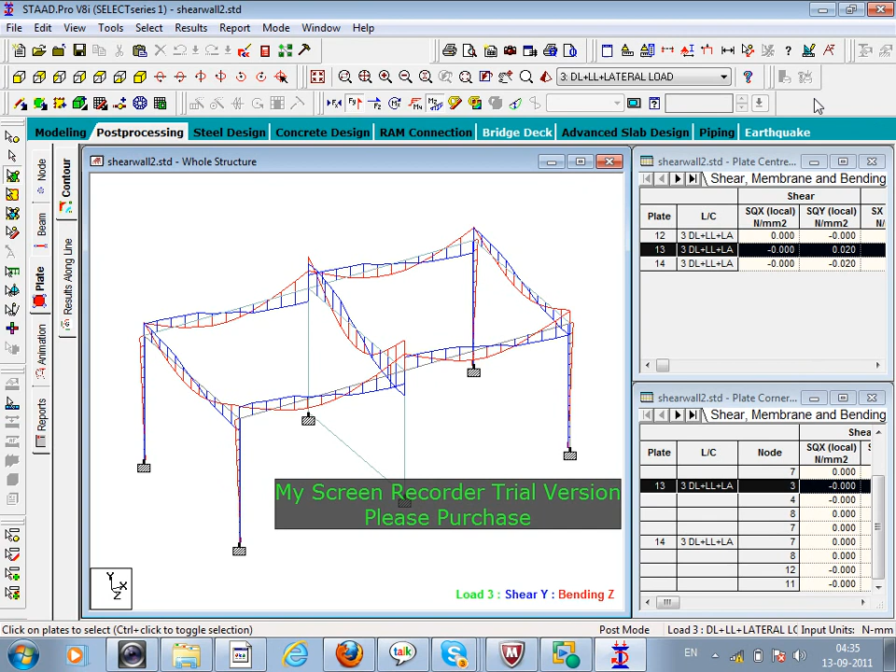If you want to remove that, then make it none, apply, okay. Complete bending moment diagram and shear force diagram, maybe for any dead load case. So you can introduce the plate element here as a shear wall and then design it.

Simple plates problem, water tank. Rectangular water tank, 6 meter by 6 meter, 1.5 meter plates.

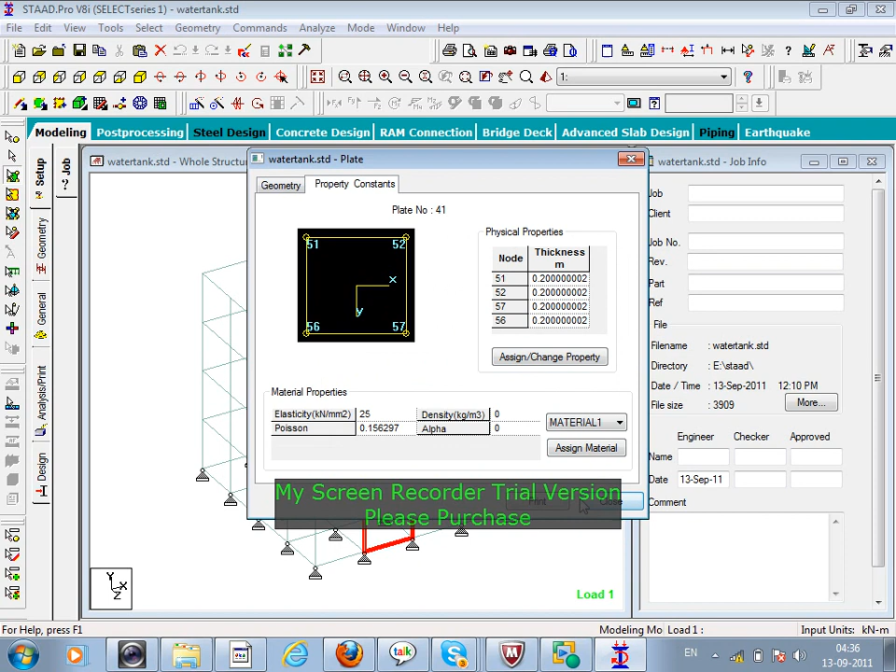Loading is given here in the form of pressure. So loads, pressure has been given. Naturally it's a water tank, so maximum pressure would be at the bottom, thereafter somewhat less, and so on.

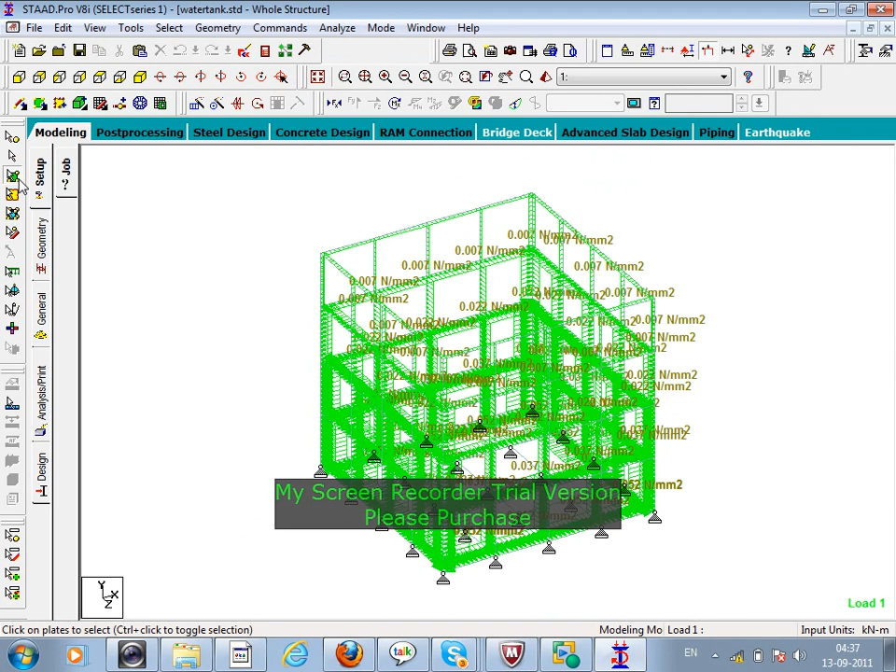If you analyze this one, only one load case is that, results.

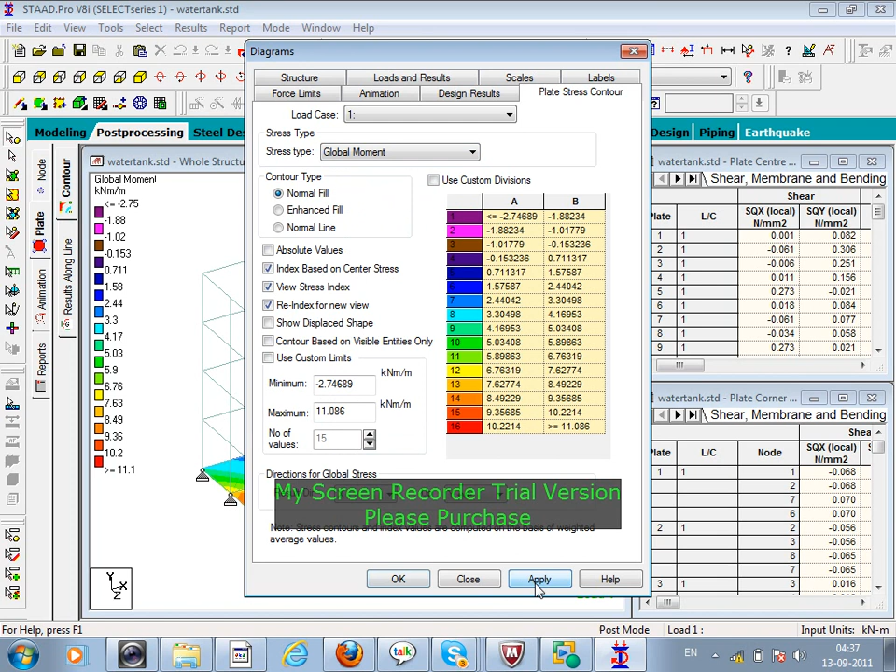At the base, stress contours are over here. If you go to the results, plate stress contour, okay. Units are being written, okay. MX local, kilonewton meter per meter.

And stresses are 15.9 at the center of the wall. That's the maximum one. So it is somewhere over here at this joint. Some stresses are minus, see this one. These are positive. But anyway, you have to interpret it properly.

So okay, I am stopping over here now.

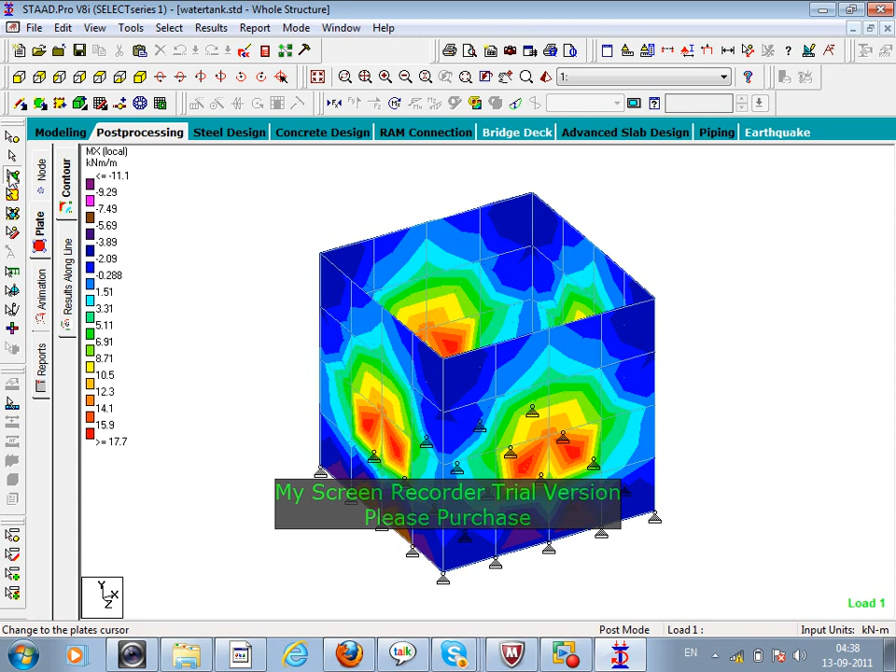Friends, if you have any trouble inside plates, tell me. Otherwise, do the exercise for that one. Vishal Sir is there with you, so he will guide you.